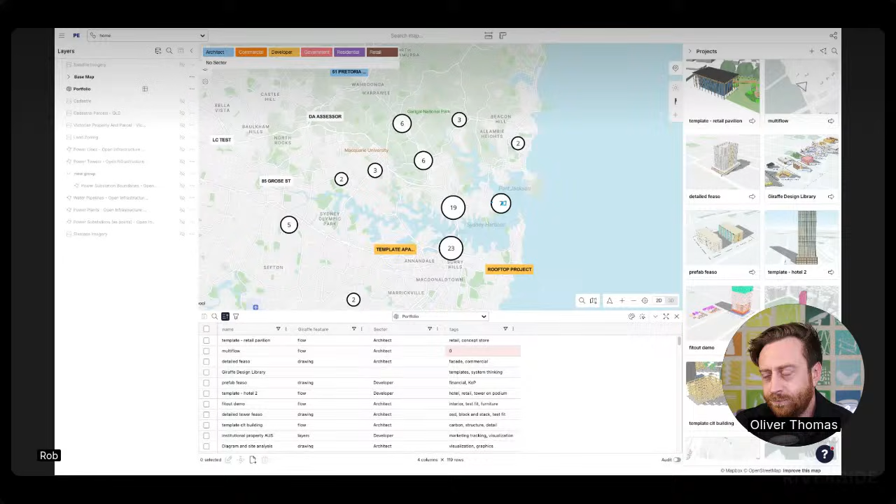The first thing that we did is kind of got a bit meta. So what you're seeing on the screen is all of my projects within this workspace. I'm actually a member of multiple workspaces, which I won't open because some are confidential - those can be clients. When you get Giraffe, you get a workspace, because in architectural practice, data leakiness is so huge and catastrophic that was almost one of the first things we tried to solve.

When I was in practice, I was always part of an ongoing research group around knowledge management - how do we manage firm knowledge? Everyone's got their little folders and scripts, etc. So this is what we theorized. In Giraffe, I see all my projects on the map because, uniquely, unlike Figma - a Figma board doesn't happen in space, but an architectural problem always happens in space. So I'm able to jump into these projects and see what's happening. I can see the preview over here and get metadata on the projects.

Like this is a deck with AI, or this is structure in Giraffe. I can tag it - every workspace will have different tags. Some developers may tag whether people are willing to sell, architects may tag by sector. I'm Giraffe, so I tag by Giraffe feature or sector - we sell to developers, governments, and architects. But then I also just add tags, and I can right click and open this project. What you're getting with this is the ability to jump in and out of projects, which is extremely powerful. If I get a call and someone's got a site over here, I may have done a project over there, or someone in my firm may have done more projects.

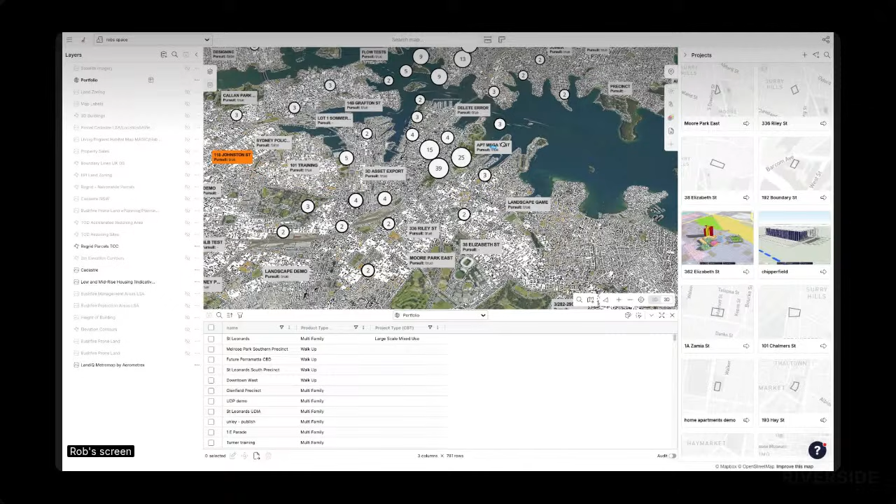But for an architectural practice, what this means is you've got your projects, plus you've got all the zoning and cadastral data and elevation data, and open infrastructure. So you've got the power lines, the temperature, whatever city or urban context you need to make a good design, to convince your client that you understand their site in a deeper way, or to actually understand their site in a deeper way, whether you're working at a master plan scale or an individual house scale.

This is just so important. To me, the foundation of good design is context analysis, and the foundation of context analysis is having some information. So the best thing to do is obviously go to the sites, stay there, take some photos, and the second best thing to do is just layer up the maps.

All right, so this is kind of like the meta, the Giraffe meta. So I'll get back to my portfolio enterprise, and then I'll create a project. I'll do one in Sydney, and let's just do one here.

So to create a project, the way I normally do it is turn on the cadastral parcels. I think this looks like a school. Yeah, that's a school. So let's acquire all of these sites over here and do some sort of project over here.

So you see, I can turn on like water pipes, and I've got the land zoning. So this is all R2, which in Sydney or New South Wales is low density res. But we're like you guys, we have a housing crisis. Everyone has a housing crisis. So there's massive upscaling and upzoning and systematization of

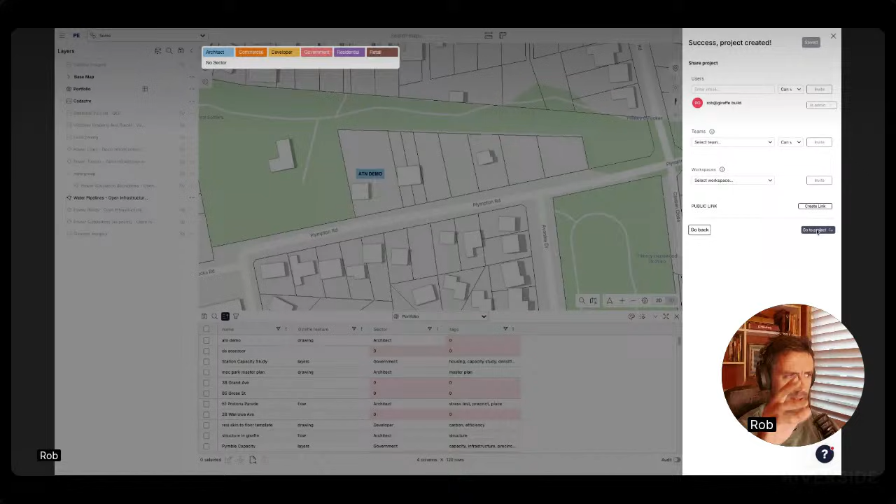That's just so I'll find that thing later, and then I save the project. Now I could apply a template and bring in or share this project at this moment. I could bring in custom templatized data layers, or usages and types, etc., or share it with teams, but I won't do that for now.

And now we're in the project, and I'm going to edit the boundary. So edit the project boundary just by typing the space bar, just like Rhino, and then stretching this out. So now my site boundary covers the parcels that I wanted to cover.

All right, and normally what I do now is kind of layer up something to understand this site. So I've got the Six Maps imagery, which is a government imagery service from the New South Wales government. And frequently I turn off, you see it says Plympton Road over there, I turn off the map labels and the trees.

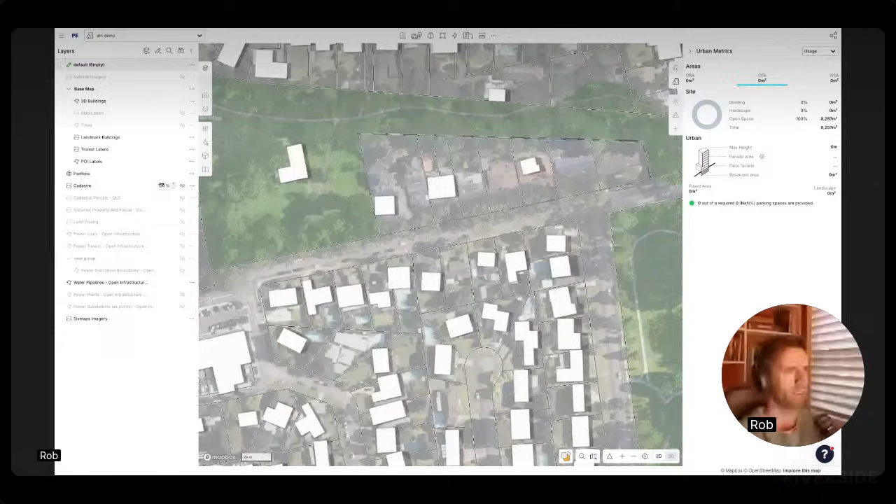And I also fade back the cadaster. And so Giraffe here is kind of like a little bit like maybe Adobe Illustrator or something like that, where I'm trying to achieve a graphic standard.

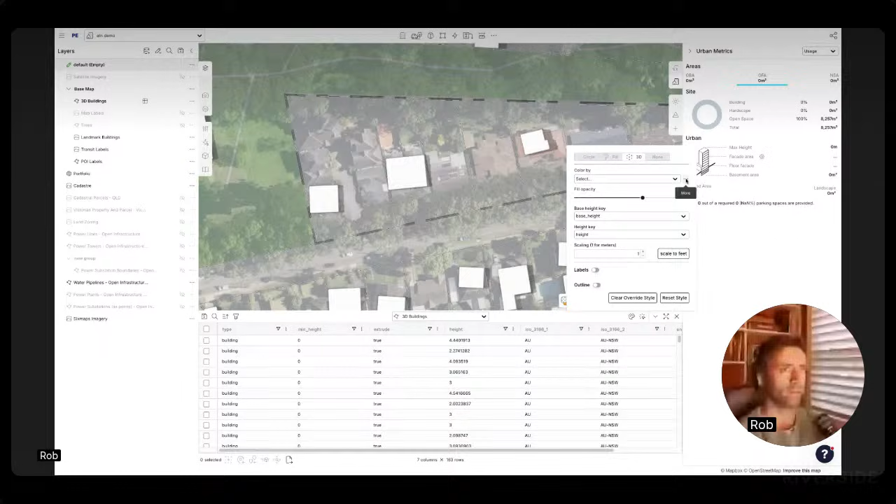And we can go quite deep. So if I open this 3D buildings layer here from Mapbox, I can click on this lens table, and I can restyle this entire layer. I can say, hey, for this I want to make it black, or I want to make these things red. And that'll make all the buildings red. So if you have a graphic style or standard within your firm, you can start mucking around with Giraffe.

It won't take you all the way to sort of Figma or Adobe, but it'll take you pretty far. And what's also really nice about it is you can do data-driven styling. So if I style the buildings by height, you can see these ones are taller than those ones, so they're a darker blue. And if I had richer data, say age or occupant or tenure type or program, then I would be able to style these buildings by those attributes.

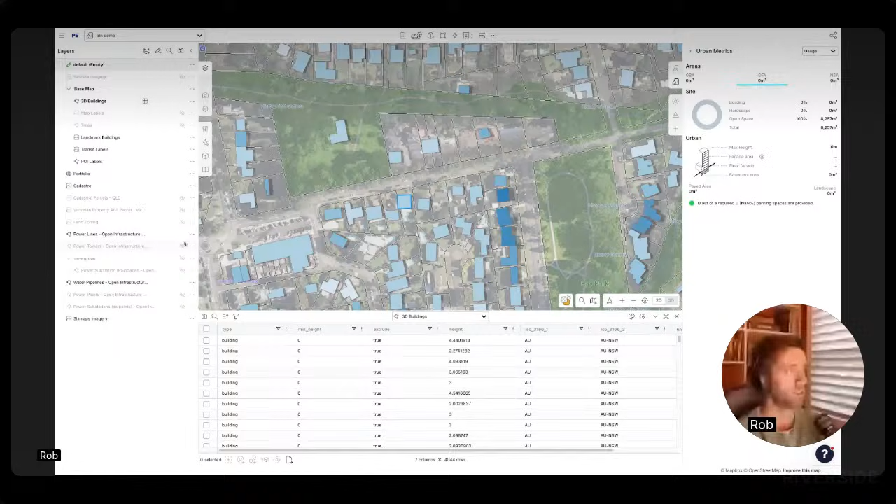So basically any vector data that comes into Giraffe, you can style. For example, if I zoom out, we find some power lines, these gray things, from open infrastructure. There's quite a lot of them, and you can see all this data coming through from the power line—the type of power line, so minor line and line. I think there's a voltage.

There is voltage, but the voltage in this area is not that great. So sometimes it shows you the voltage if the open infrastructure maintainers have added it. Other times it doesn't. So you may color these power lines by voltage.

But if we just zoom back to our place—it's easy to get lost in Giraffe because the map's always on, whether you're in your project or out of it, you can always see your portfolio as a layer, and you can also see all the data. So you're always in the world. We've got this little recenter button so you can find your way back.

All right, so let's get rid of that color and just make those buildings white again. Fixed color, something like that. Okay, so there they are.

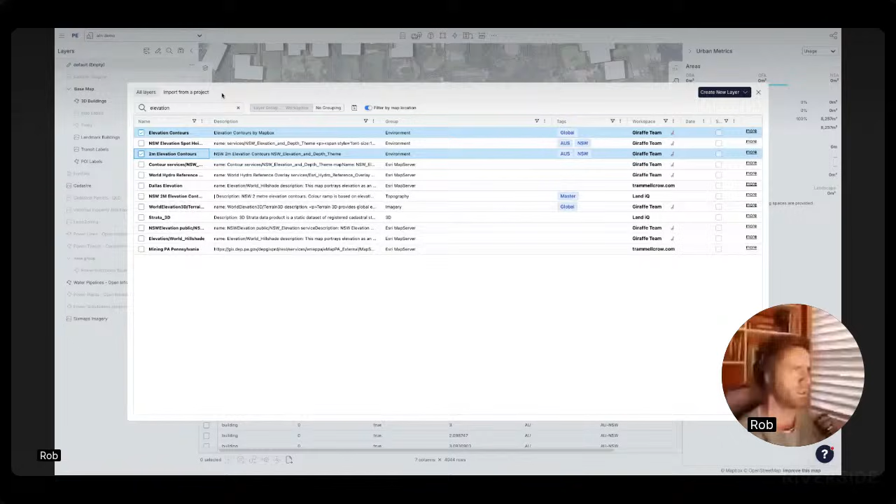All right, so let's say these houses are to be demolished, and we're going to do a master plan over here. So I've brought in the data—maybe we should talk elevation. I'll bring in the elevation contours. I can bring in the Mapbox ones, or New South Wales has them, the US has them—sort of every geography has them—and there they come at the bottom. It'll take a while for them to load. And if I fade back...

So I can also reorder the display of the layers. It's probably hard for you to see—sorry, if I actually reorder that. Oh, that's not working. But it's going from 100 to 92, so there's an 8 meter fall, so it's not huge. Okay, it wants me to do that. There we go. So now if I fade that back up—again, probably hard for you to see—but those elevation contours are sitting on top of that Six Maps imagery now.

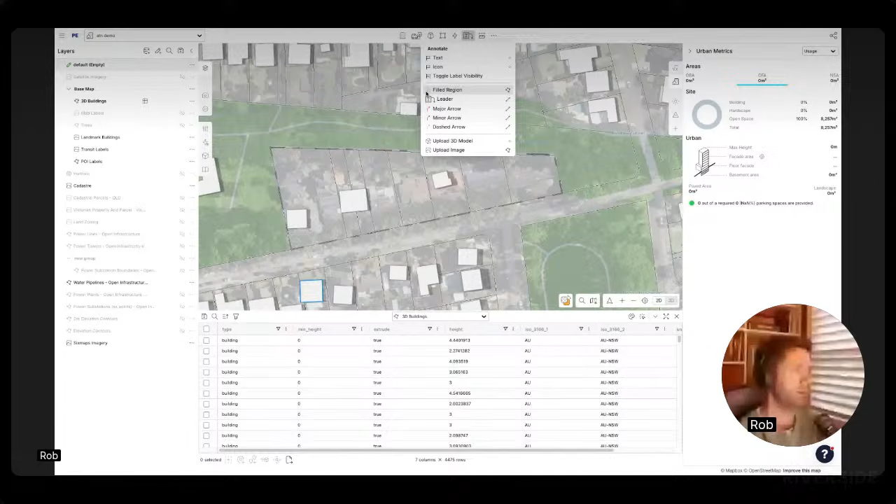All right, so let's say we've analyzed this site, we've looked at it, we've looked at nearby projects, we've got an idea from our client what they want to do. Now we can actually start, I guess, annotating. And so this is where Giraffe, again, is kind of like SketchUp—sorry, not like SketchUp, like Illustrator. It gets like SketchUp in a second.

And it's all property driven. So because Giraffe is GeoJSON, there are only 3 primitive data types, which is point, line, and polygon. I guess you could say multi-polygon, which is like a group of polygons. But if I draw a line like this, it comes in as a line, geolocated.

We're translating it to Cartesian, so it's lat long—if I show you this, it's got its coordinates, which are 151 minus 33, so latitude, longitude. However, we also have these Cartesian coordinates, which are translating it so it's in an X and Y space. So it'll come into Revit or Rhino according to a transformation.

If you guys have ever tried to geolocate a survey or had to work at scale and deal with shapefiles, with like Meerkat or Heron, there's a bunch of QGIS, there's a bunch of sort of geospatial stuff in Rhino and in the ecosystem.

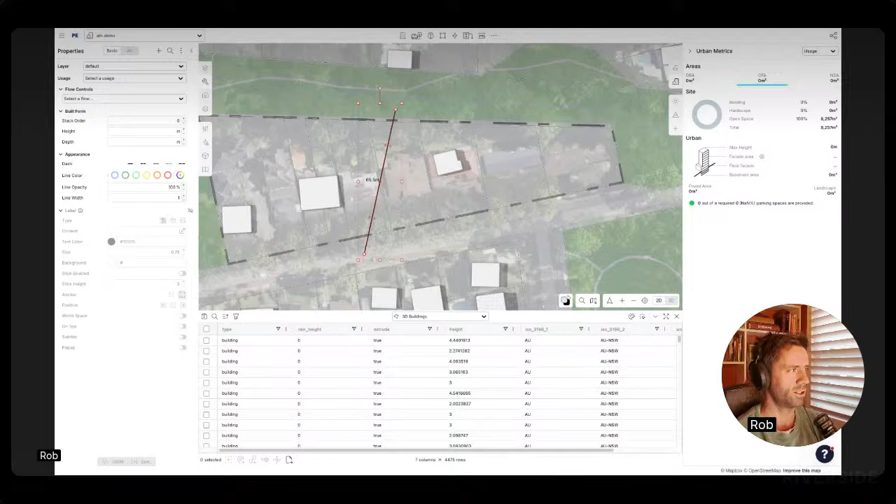You'd sort of know this pain. But this line is just a line, and these are its properties that it has right now.

If you look at the raw database, this JSON, this is what actually sits on the Giraffe database. So it's got a stack order, an app ID, a bunch of properties that make sense to the Giraffe system. So this is project 64994.

But now I can just add properties to this thing. So if I add like a stroke, just like SVG or Illustrator, and I make it red, and I hit save, the line goes red. And if I add stroke width, the line will take whatever stroke width I add. I think 1/8 maybe. There we go. So now I've got a really thick red line.

So instead of letting you muck around with this raw data, we just display the data over here. So you can see the line color is the stroke property, and I can then go and change it. So the way Giraffe works is the raw geometry plus these properties that you add get interpreted by the Giraffe engine and then get displayed or exported.

And once you've got that, you kind of get the whole of Giraffe. There may be other ways of doing this, but I think you sort of understand how data sits on a database. Like Revit, ArchiCAD, Rhino, I don't understand how you would store geometry and properties unless you have this kind of mechanism.

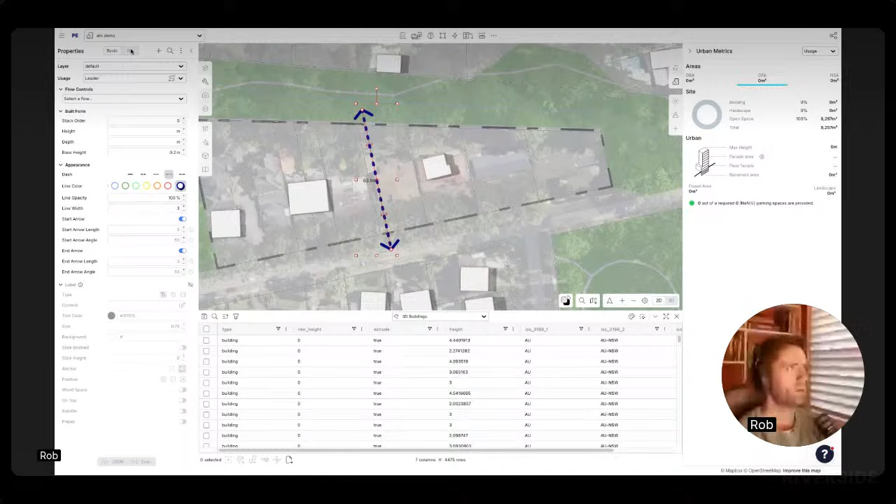So to make an arrow, what we need to do is add, let's do this dashed arrow, we just need to add a bunch of properties. Here they all are, there's stroke, dash, arrow end, all of this sort of stuff. But we just render and look at them nicely like this. So we can change the end arrow size, and I think even the angle, all sorts of these properties.

And make things look good. So enough of that, and properties, banging on about properties. Let's divide this site up architecturally and say, well, maybe what's cool here is, definitely what's cool about this site is it's surrounded by bush. So let's get rid of the stroke, make this arrow green, make it wider.

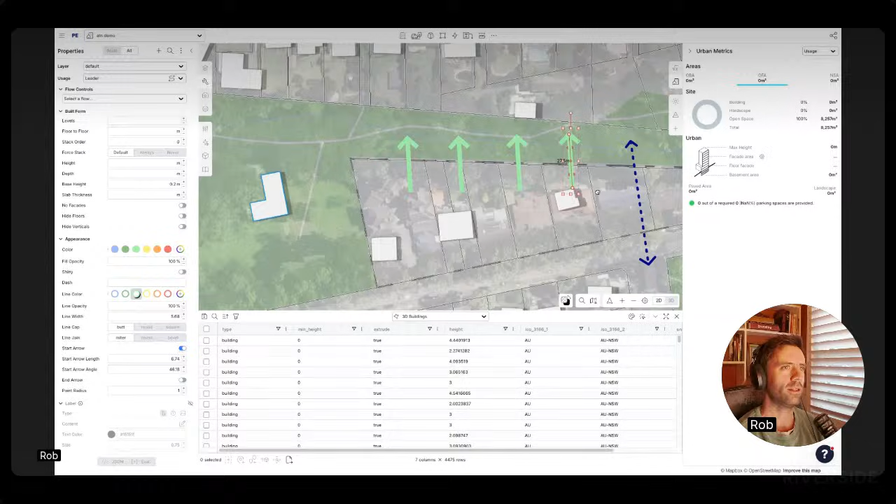You can even make it square, I only found this out recently. You can make square or round arrowheads. So I put in a feature request for it, and it was done, I just didn't know. So there's tons and tons of properties in the Giraffe system, and the more you know, it's probably about 200, 300.

Once you know them all, you can do anything, but often it takes a while to learn them all. I may zone some stuff up. We actually have, I think in here, a region. And maybe this is time for me to introduce the next concept in Giraffe, which is usages, which I would say is analogous to Revit families or categories.

Basically they're just buckets of properties that are not attached to any geometry. But I have a region property, a region category or usage that has a color baked in, and I'll make it a bit redder. It's got a fill opacity, a dash array, a line width, a whole bunch of properties.

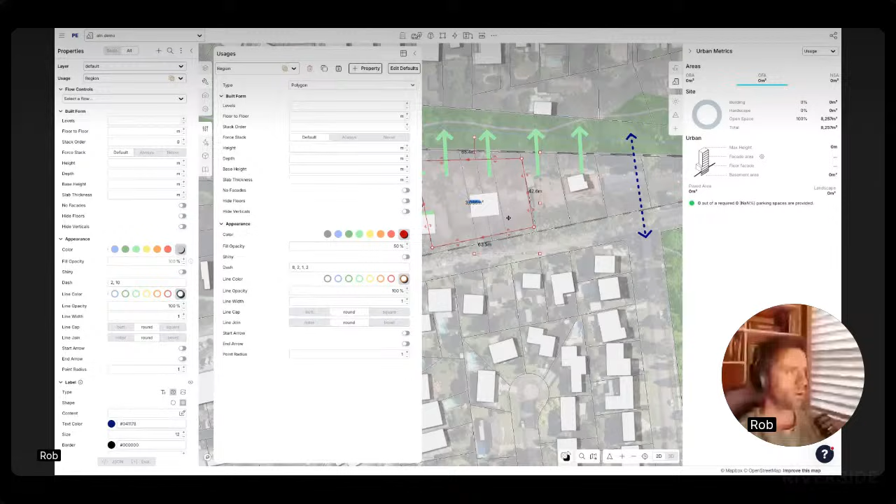It's called region, and if I apply this region usage to this geometry, it's going to get all of those properties. Let me turn off the imagery just so you can see that clearly. So now this is applying to this geometry. It doesn't have this red color itself, but it flows down through the usage. So there's actually two ways you can apply properties to a Giraffe geometry, either directly or through these usages.

I'll save that, no, cancel, I'll save that. Let's make this a bit darker, and just make this 1, and save that. All right, and you can see I made it lighter. There we go, so now you can see it's all flowing through.

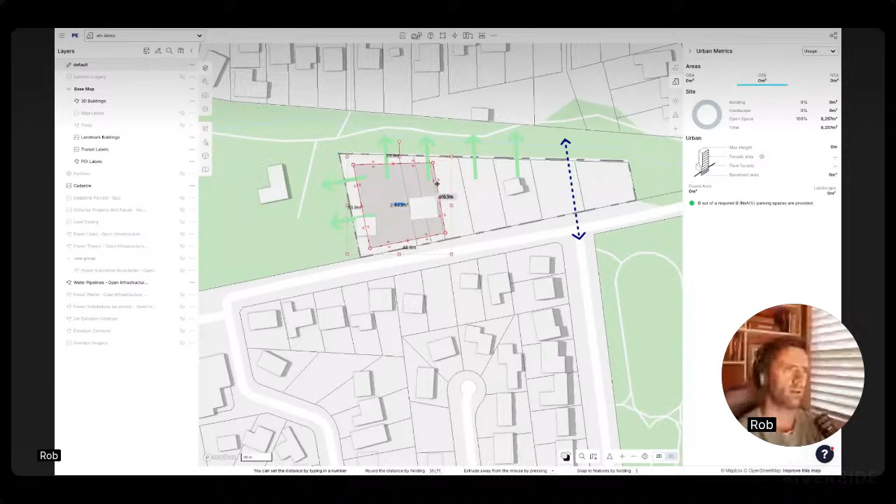What I'm trying to do here is divide the site into buildable areas. You can see it's giving a label there of 2,800 square meters. So maybe we'll divide something like this.

Since we need a connection there, there's really half a parcel back here we'll do something with—we'll figure that out. So there's our three pads where we'll put built form. I'm going to turn off the buildings because they're frustrating for now, and change this color to make it a bit darker. There we go—I've done the crudest of crude site analyses, sort of design moves and diagrams.

And now we can actually start drawing. And that graphically is not terrible, right? The goal here is that you can put this in front of a client and not feel embarrassed. You can do this live with a client, sitting with them and drawing.

Now things will speed up a lot, because the next thing Giraffe becomes is kind of like SketchUp. So my usages include not only arrow types and region types, but also all the built form and program. I've got a retail usage, and it's a bit richer—it's got a floor to floor, an efficiency and a sell efficiency, a parking required, and a whole bunch of data around how many jobs this creates, the net rent, the construction cost. And you as a user can always add your own.

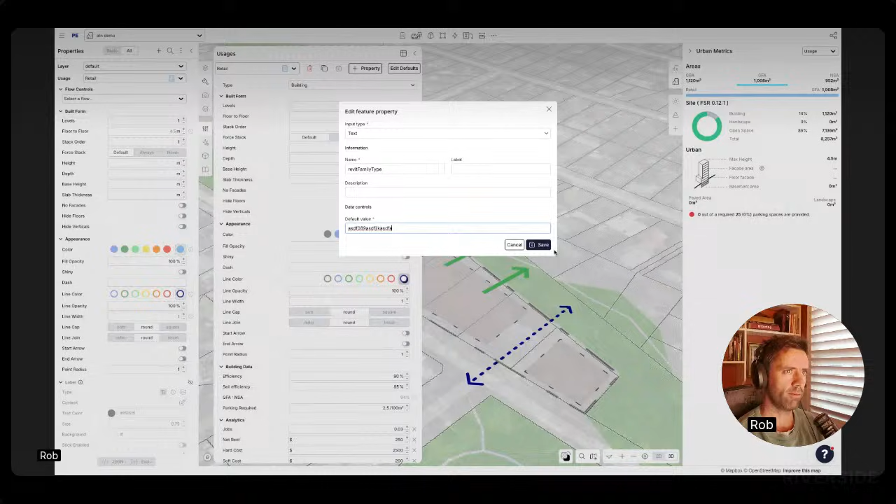You could add a Revit family type or whatever it would be, create that property, and make it text—either put in a hash ID or a name, whatever you'd want. Your client may have four or five types of retail, or you may want to know KPA, like kilopascal on the structural slab, or the power draw. You just add these properties to the retail usage, and when the designer is drawing the shape, all of those properties flow through.

It's very much like SketchUp. So what I'll do—this is annoying, you can see I'm selecting the wrong thing there—is chuck all of this stuff onto a different layer. I can either go to the layer menu and create a layer, or use this nice little convenient shortcut. I'll call this 'site analysis' and create that layer, so now all of that stuff's on site analysis. Then I'll activate the default layer so I'm drawing on it, and lock site analysis.

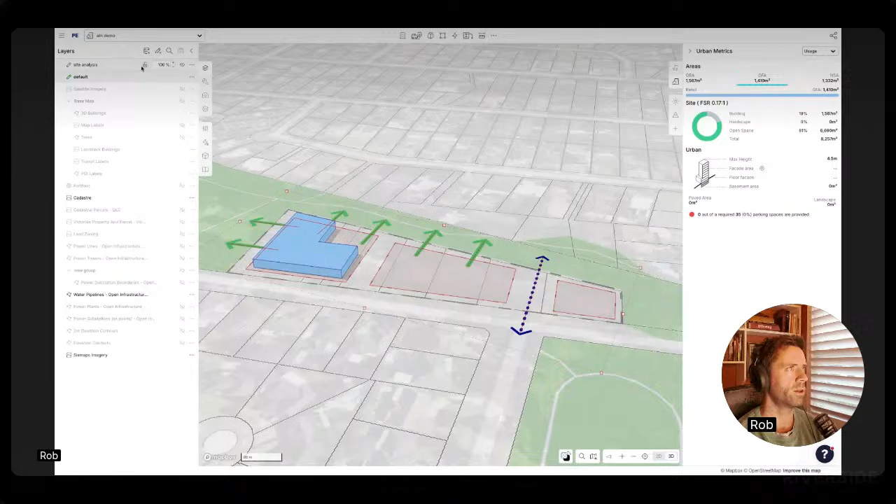And now I should not—see, now I can't click on it, very much like Rhino or ArchiCAD or any package you've ever used, Photoshop. It's very shortcut based—I'm mad about shortcuts—so I can add and remove levels, hit X and split, and sculpt and form that way.

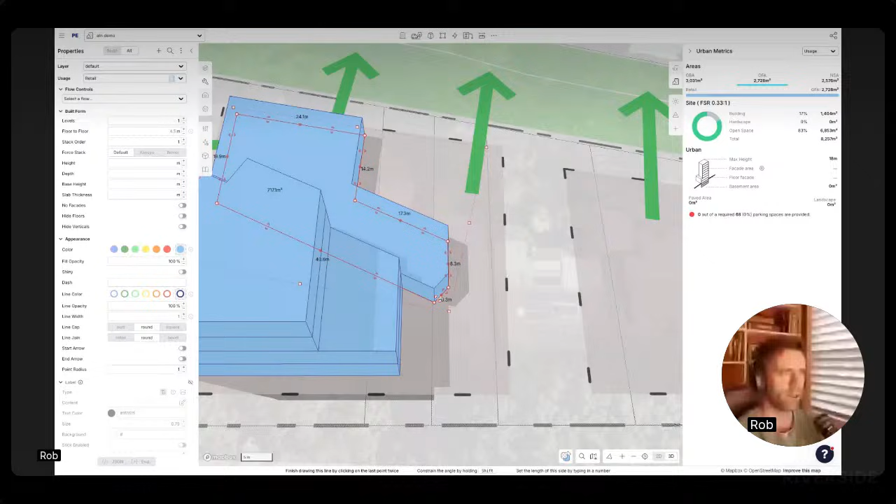Giraffe is very much designed to be playful. You're sitting in a meeting or a design charrette, seeing stuff live, just playing with form, and someone says, 'No, that's not going to work, that's a terrible acute angle'—it feels like you're being attacked. So we can just chamfer that off, cut this thing, or say, well, does this work? Should we put a little through-site link like that?

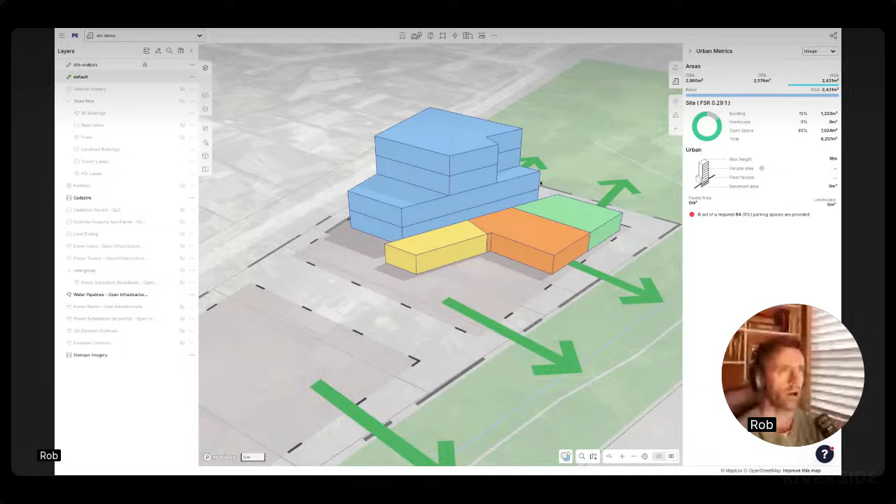You can't intersect points in Giraffe, so self-intersecting polygons will throw that error you just saw, and we can divide stuff up and recolor things—maybe that's a cafe, that's a library, that's a liquor store, whatever it is. So you can chop and plan and slice. And what's happening is the Giraffe system on the right-hand side is doing all the area calculations all the time—total retail, gross building, net building, sellable building, maximum height, facade area if you turn it on. A whole bunch of data is dropping out of this very simple model all the time.

That's kind of our point—that's the stuff the computer's really good at: taking complex sets of assumptions, hundreds and hundreds of data points, doing hundreds and hundreds, if not thousands and thousands of calculations, and presenting the result back to you. To me, that's the best use of AI—it's tedious and annoying, and you get the computer to do it for you.

All right, so we've got our weird little retail thing over there, and we'll put some residential. Maybe this is the next thing that we can add in. So we've got the maps that I've shown, the mapping, and this sort of usage data category stuff.

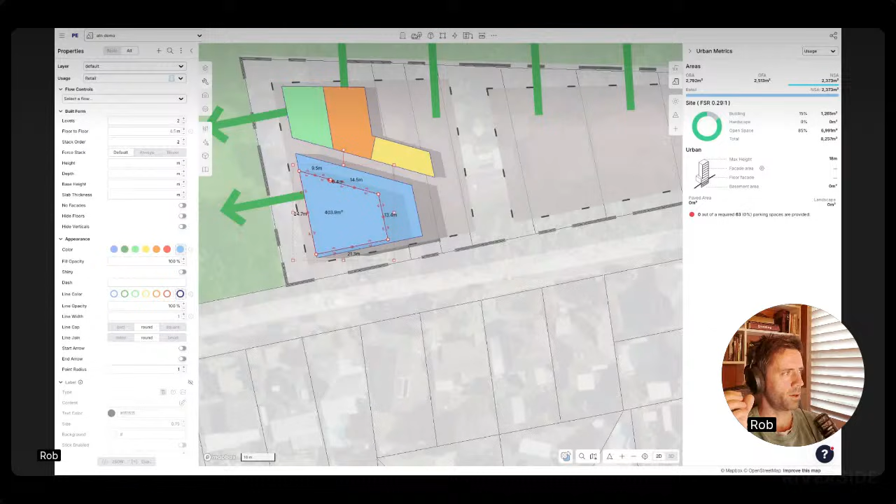The next thing we have is actually like a grasshopper in Giraffe. I loved Grasshopper, and this whole geometry, this root geometry with properties on it, was basically the way that you use Grasshopper. It was so heavily informed by that, where you draw two lines in Rhino, put one on one layer and one on another layer, then read those lines into Grasshopper and do stuff with them. That's where that came from.

So we have algorithms. If I want apartments, I can draw a single line, and the computer generates all of these apartments. And if you want to understand a bit more about that data flow, you can see what's going on here. You just read the feature and create an apartment.

This box here, our team builds. We build what I call the big algorithms, things like apartments, subdivision, and a few others. The key to look for is dendrogram, that's our big one. So apartments, enclosed polygon is huge. Envelope is great, I'll show you envelope in a second. Grid fill is fantastic, that makes a grid of columns.

Parking lots, that's another massive one. But then we've got all the classic small ones like add, map, all the ones you'd see in Grasshopper—take the first item, divide, construct a vector. I can double click on the canvas and look for these things: vector, vector angle, vector from north, all of these sort of things.

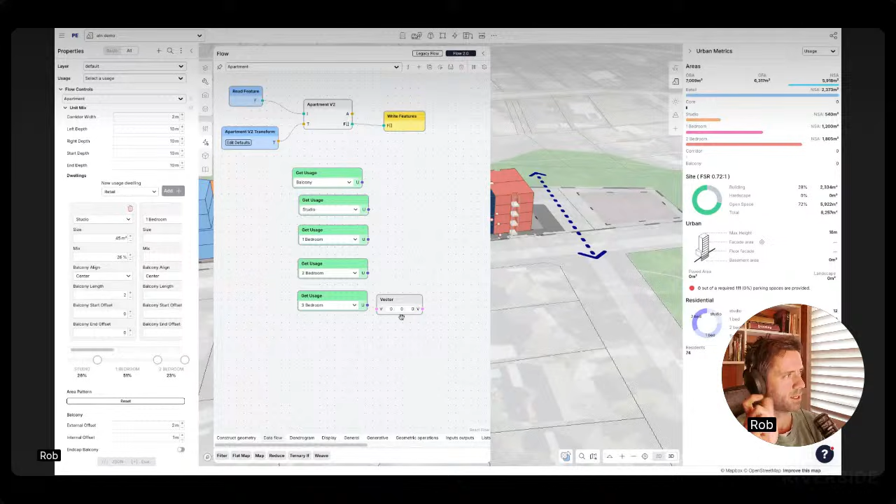So I call these ones small algorithms. These are normally doing something very small, very discrete, and you join them together. This is a big monster, but it does a very useful job very quickly.

So let's say we're going to do this. We're going to do this. And these kind of little Juliet balconies are not doing it for me. We can change that—you can parameterize all of those things. You can change the internal and the external offsets, so you can have them basically fully inside the buildings like this.

Because this algorithm is so big—there's been many, many person years of development on this algorithm—it's got a lot of depth and complexity, and it can do a lot of things. So have a play with it. It can't do everything, but it can do a lot of things.

One thing it can't do, for example, is deal with the ends of buildings. So often what we suggest is if you have a building like this, use the algorithm to draw most of it, but then draw the end bit yourself. So maybe we'll put one large 3-bedroom apartment over there, and then I'll just draw the balcony in manually.

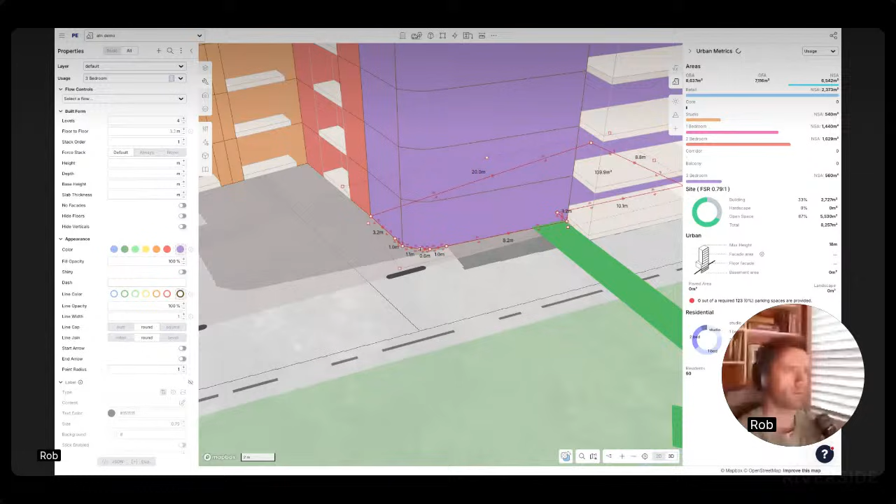This mixture between automatic and manual is a key thing that Giraffe also tries to do, because every project's unique—you always need to jump in. Can we chamfer around one corner? No, you have to do it manually, like I'm doing now.

All right, so there's our building, and some other algorithms, like some classic ones, would be some landscape—so we can do like a row of trees. If you look at what's happening here, it's just grabbing a line, putting an array on it, and then writing this feature out. It's a very, very simple little algorithm.

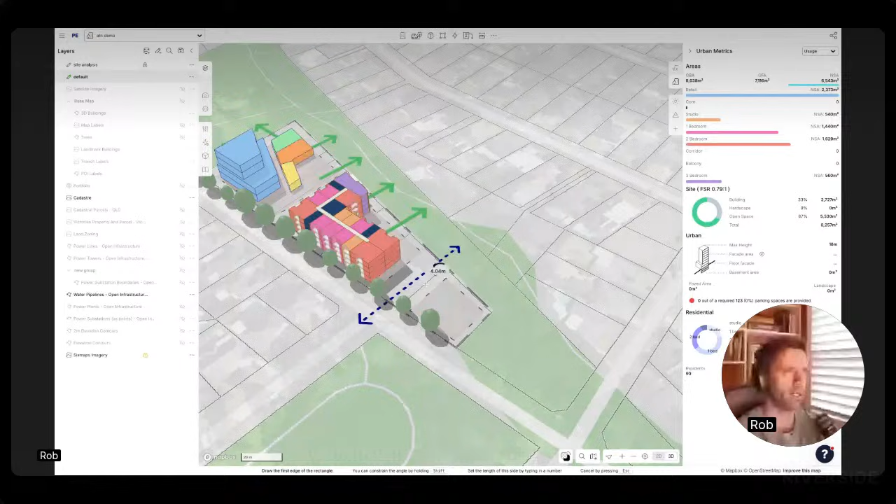I'll do this little parklet—I like this tree-lined park. Maybe we need a sports field over here, or not a sports field, but a dog park. And that one's pretty easy. What it's doing is taking the raw geometry, rounding the corners by 10 meters, which is maybe too much—let's go 5 meters—and then grabbing the edge, putting the trees, and outputting the trees in the park.

Sort of that simple. And I can change the colors, etc., by mucking around with my usages. So the usages, the guiding geometry, the little polygon, and the flow all work together, and there's this cascade of data through the system, which means I don't have to do much and the system does heaps. So I've got a dwelling mix, I know how many car parks I need, and I know my landscaped area.

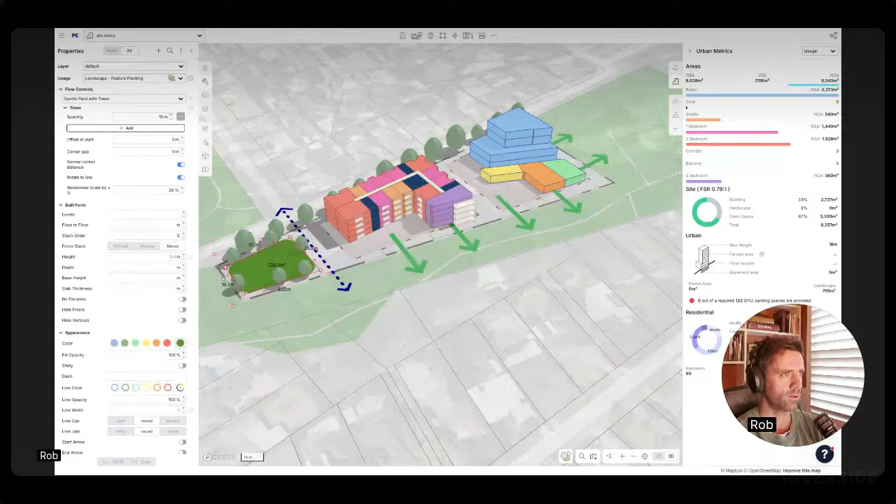I can do my facade area. I've got so much information, but I don't even look at the right-hand panel - I just don't munge that data, Giraffe's doing all of that. What I, as the architect or designer, need to understand is how this system is architected, how the data flows through, and then be able to leverage it. I'd say it's very similar to Excel - like building an area schedule, a financial model, or a zoned program in Excel. In Giraffe, you should think of it as maybe 3 or 4 Excel sheets: there's the inputs, the geometries, the flows, the transformations. But once you've got it worked out, it works like an absolute charm.

So let's do another option now, and I'll build a flow for you because I think that could be fun. So this is the default. What I'll do is duplicate this layer, turn off default, and rename default to option 1, and default copy to option 2. The amount of time we've spent trying to make this layer menu nice - so you can double click and resort and group, etc. - is extreme. So these are the options.

So I can collapse that, turn off everything, open it, turn on everything. It's fun. Okay, so here's option 2.

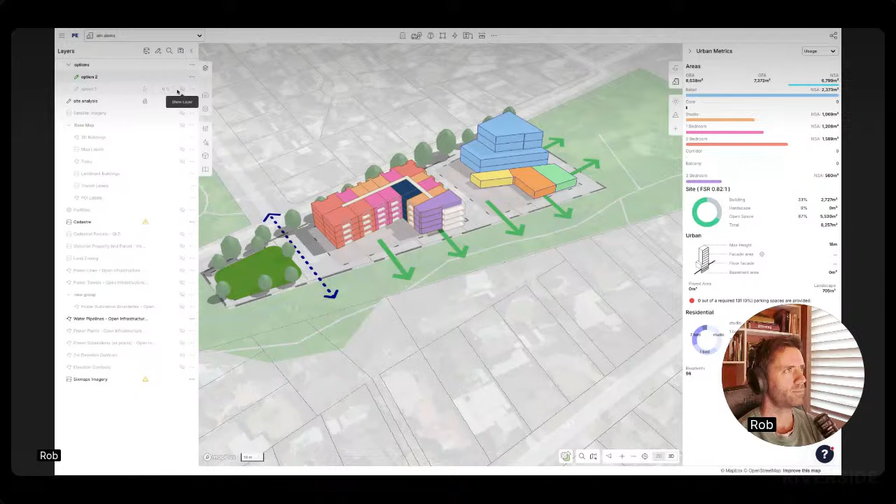So for option 2, I'm going to say we need a difference. Maybe instead of an L-shaped building, we do a high building like this. And I guess we better do that like this, and maybe we do another one, right, this - and I'll just drop those guys off like that. Maybe not the world's most efficient building, and it's got a suitably dystopian feel. There we go.

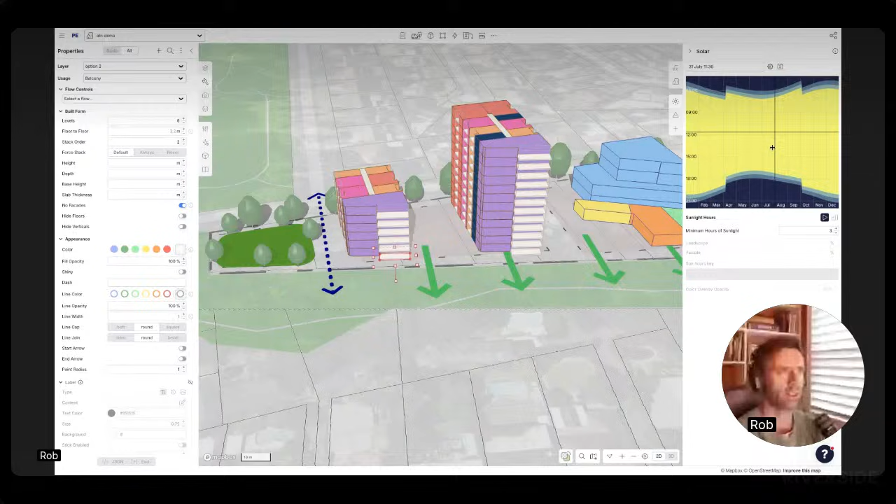Now look at that - look at the sun, right? Because we've got the solar in here, we can test the sun at any moment. You can see that's not working in winter - this is every day of the year. You can see the daylight saving. Here's winter in Australia - it never gets that dark, but I've changed the time. This is one day, the 27th of July, but I can also change the day and keep the time constant. So obviously the sun is most annoying in winter, and actually this is totally fine because this is facing north - this place is always going to get a bit of sun.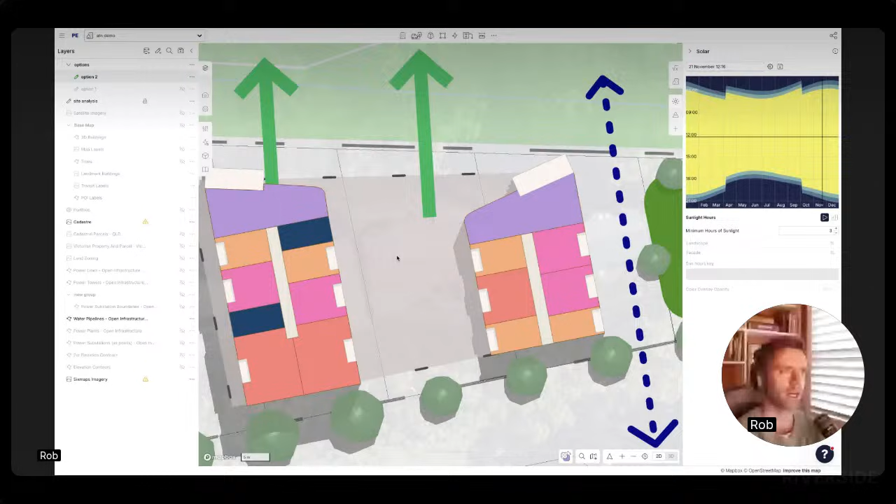Something you may do is I'm just going to mirror this. So I use the snap key and the mirror key, and now I'm using the base point move by hitting B - so B, snap, and then shift B to rotate, so I get that thing exactly right. So now I'm making more of a sun trap over there.

And now let's make a flow. Let's say the scheme is accepted and people are interested, and now we just need to do a bit of design development. These trees are too big, so I'll add a scale parameter and just scale them down - scale property. I could put them on a landscape layer if I wanted to. But let's make a flow.

What I'll do is a very simple flow which articulates the facade. Okay, hang on, I moved way too quickly there. In Giraffe, not like Grasshopper, the flow lives on the geometry. So now I've created this identity flow and attached it to this geometry - this geometry had no flow. So this identity flow, let's rename it - I'm going to call it Facade Maker.

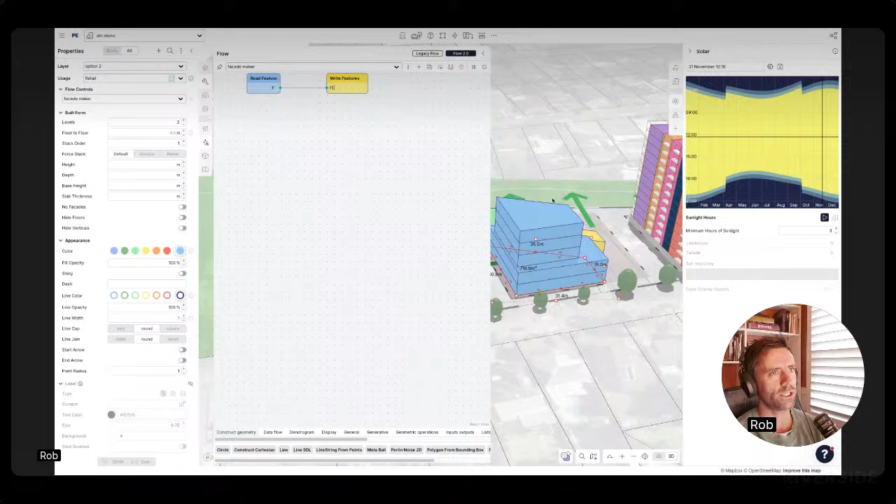Right, so now this geometry has Facade Maker. This Facade Maker flow is in the document, in the project, so I can go and apply it to anything I want. But you don't reference geometries into the flow - you reference flows onto the geometries. You can reference geometries into the flow, but you need to reference a flow onto the geometry. I'll show you why that's cool in a second.

All right, so here's Facade Maker, and by default it reads the root feature - that's this feature, it reads it in and then just writes it out. Now what I'm going to do is muck around with this geometry and write it out, using this stroke dash transform that we have. Stroke dash is a cool transform.

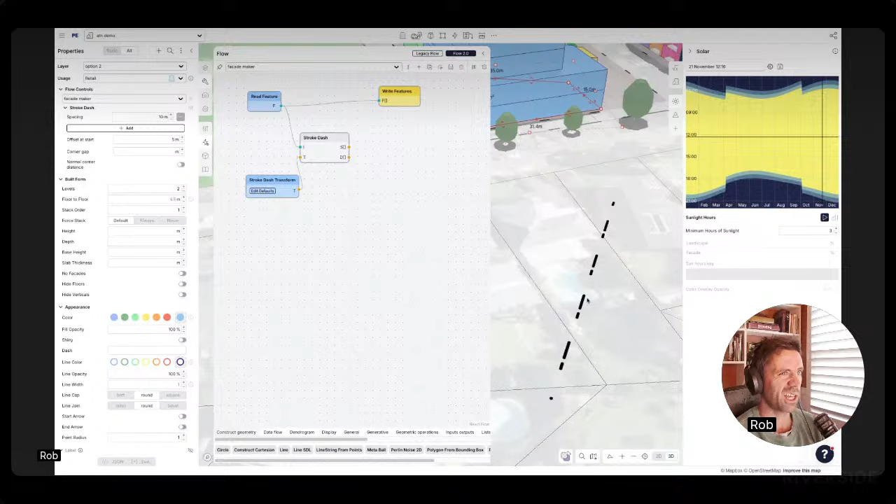It takes in a line or a polygon and converts it to a line, and it breaks it into a pattern, a stroke dash pattern. Very similar to SVG. So if you have a line, you see this dash, and if I go 1, 5, 3, 1, it breaks it into a 1, 5, 3, 1 pattern. The stroke dash turns into those stroke dashes, which is like the fundamentals of architecture.

It's just syncopated grids, Chipperfield, rhythm, and I'll show you that in a second. So we have the stroke dash algorithm. The transform is the parameters, it's this stuff over here. So it's the spacing. If I want to go 1, 5, 3, 1, we've just got a UI that's creating that stroke dash pattern.

I'll bring in a reader panel over here to see what's happening. And to actually see the data in this flow, you have to click these goggles. There you can see the data coming out of this transform. So there's 1, 5, 3, 1, and there's the offset of 5 at the start. So that's what the actual transform is. That basically goes into this stroke dash algorithm and tells it what to do. That's how you tweak the nodes, whatever they are, the knobs.

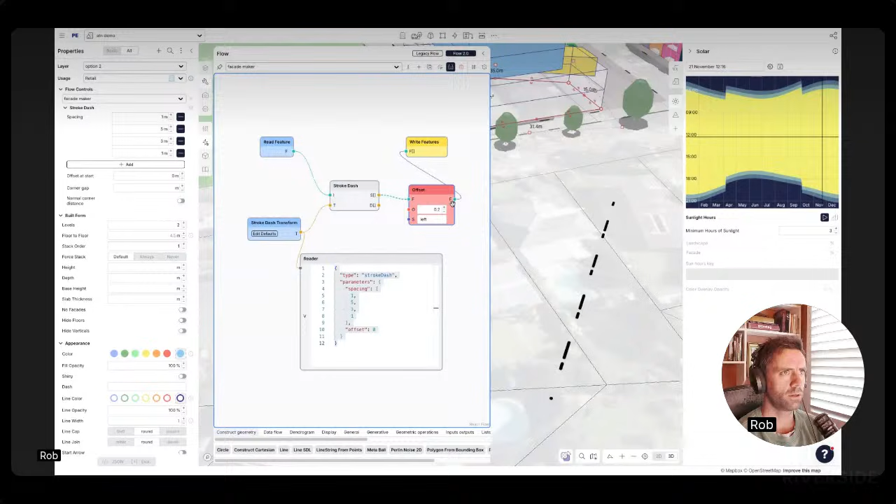And then I'm going to do an offset. So I'm going to grab the strokes and offset them to the left, and I'm going to offset them 0.2. All right, and I get nothing.

This is why, okay, now the reason I get nothing is because this is an array of strokes, and this offset requires a feature. So you can see there's the square brackets, it means an array. Now, Grasshopper does all this implicit array mapping. So if you put an array into a box or a battery in Grasshopper, it automatically passes that array.

And that's why you have these trees and this tree matching stuff, which is really fun, but also very difficult to maintain, and I would say almost insane at scale. You see people do these huge scripts, and they've got these trees, and once you've got 3 nested trees, you're absolutely cooked.

So we just use map, and map basically, it's like a loop. You take in an array, you map over, so you apply a function to every element in the array. We do it very explicitly, which is a bit more cumbersome, but in terms of maintenance, it's much easier. And so you can see now I get this thing.

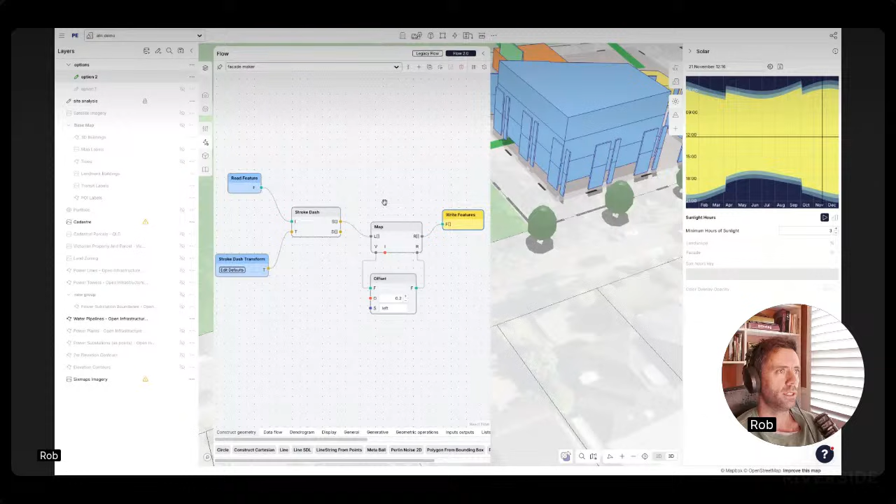So now what I need to do is, you can see I'm writing out my root feature, which is this retail. And now you can see there's a little facade over there, which isn't great. It's also retail, so there's a couple of options I have here.

I can write a feature property, right? And because we know that Giraffe is just properties, I'll get a parameter, an input parameter, and I'll call it facade color. I'll select the type color and default it to like a bricky brown. And so now I'm grabbing this and writing a color, and now it goes brown.

And now you'll say, well, how did that array, how did that feature pass that array? Some of our batteries support array passing. But what I should really do is be consistent and put everything inside a map. We're sort of slowly trying to be smart in terms of how things are passed.

And sorry, my graphics card is just stuttering there. I'm going to refresh and hope for the best. Okay, fantastic. That's the other nice thing about Giraffe, sorry, is that it's all in the browser. You just hit refresh and it comes back. It takes a while for the sun to load in the right spot. There we go. Okay, so let's get back into that flow.

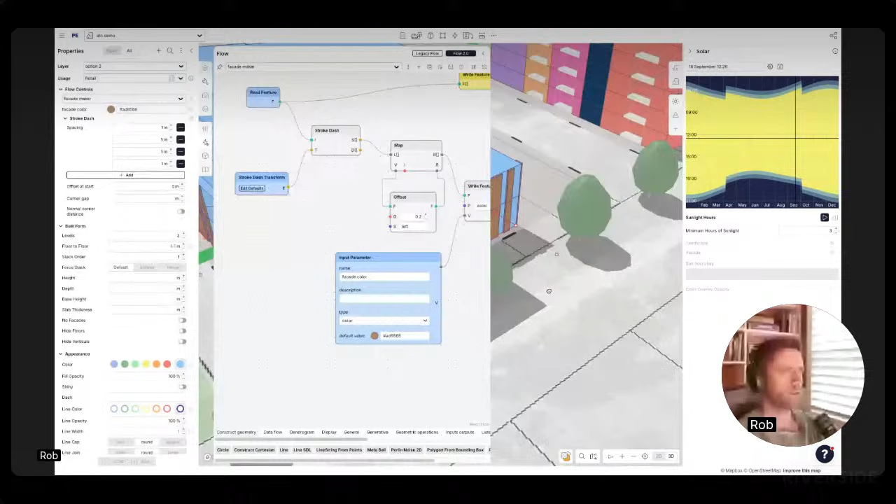There it is, so it's going brown and we're getting the stroke dash. All right, and now what I'm going to do is the exact same thing on the dashes. So the strokes are these bits and the dashes are the other bits, the negatives. I'm just going to copy this by holding Option, and I'm going to put this into dash, right? And so now, because I'm doing strokes and dashes, I'm getting everything.

And then I'm going to write another feature property. This is another Giraffe property called no facade. And no facade makes no facade.

There we go, and now I have this facade. I don't want this thing to be a sill, I want it a bit higher. So I'll write one more feature property, base height, and set it to, I don't know, 3 or something. Just 3. Let's see what that does. There we go, okay cool.

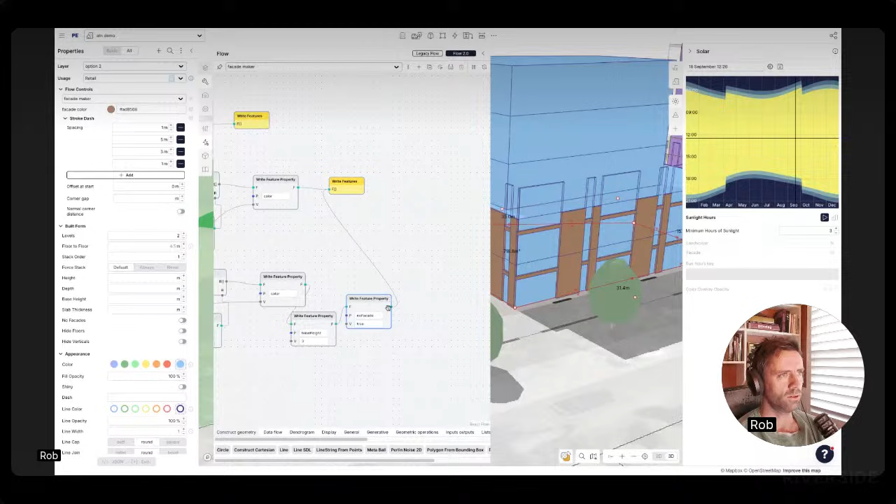Now you can see those verticals. When we do no facade in Giraffe, we render the verticals out unless you do hide verticals. So I'll write one last property, I think it's hide verticals.

I was on the draw layer, was not the active layer. So if I do a 1-bedroom, right, there's my usage. If I click no facade, the facades disappear. And if I hide verticals, the verticals disappear. Okay, and it's hide verticals. So if you get stuck and you're trying to understand what Giraffe's doing, you just click on, do it, look at the data, and then come back into here. So hide verticals.

And set that to true. And I would say what I'm doing here is probably the bad way, because I'm explicitly writing these properties down here in the flow. Whereas what I should do is create a usage here called facade, and set hide verticals true and no facades, and do all of that stuff here. So I should have mullion, transom, and my facade components. That would work really well.

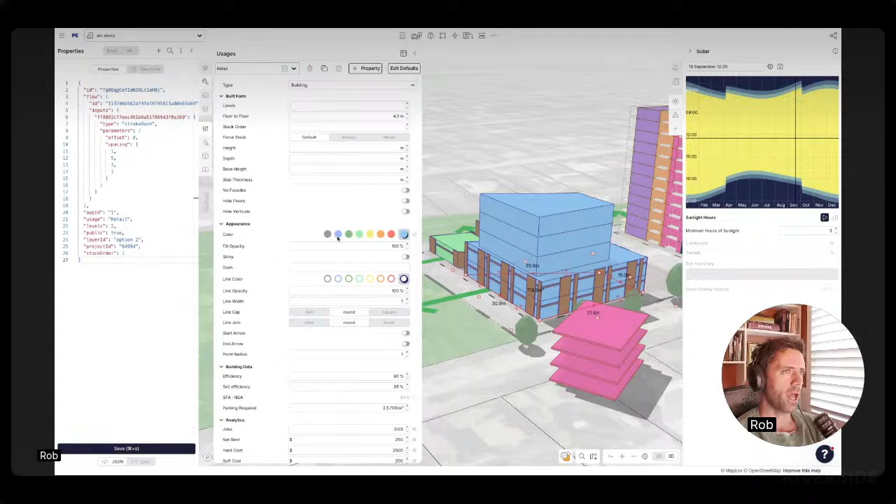But now what's nice is you can see, because I applied this facade to this thing, it got applied to this thing too. And I'm just going to hit never stack, so the facade's stacking over there. So now I've got one flow applied to 2 geometries — it's applied here and it's applied here.

Now what's really cool is the parameters that I input. So for this flow, that's anything that's blue — the feature, the stroke dash transform, and the input parameter facade color — those are saved per feature, because obviously the feature is different. So this green feature is this blue on this one, and this blue feature is this blue on this one.

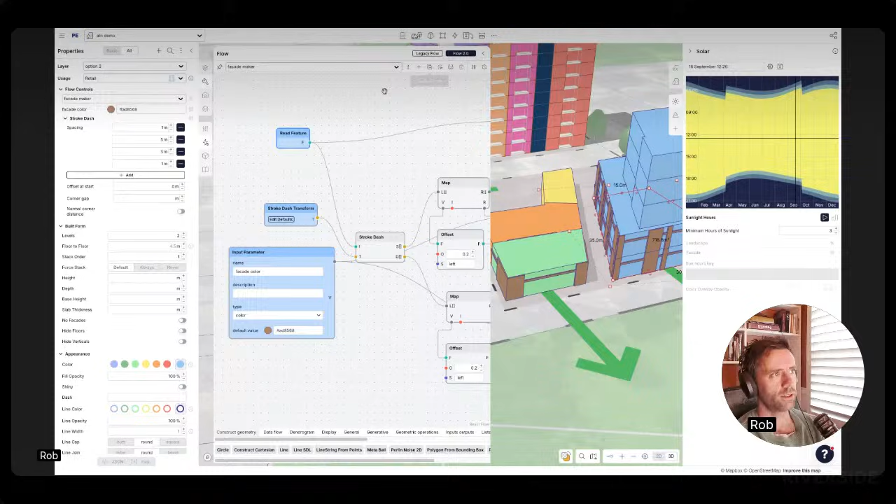And so what I'm able to do is set this to 1, and set this to green or yellow or whatever I want, maybe like a white color, and build these facades out like this. So that's one piece of logic that's now repeating across, and I can go and apply it to all of these things. I can just keep putting the facade maker on this stuff and changing the stroke dash array.

So maybe it's 1 and then 2, or maybe it's 0.1 and then 2, and maybe that's 0. Once we start doing this stuff and get a bit further into design development, we want to parameterize that offset. So we just add an input parameter — this will be facade depth. It should be a number. Actually, I want it over on the blade, not on the transom. And the default value should be 0.2, and that should work.

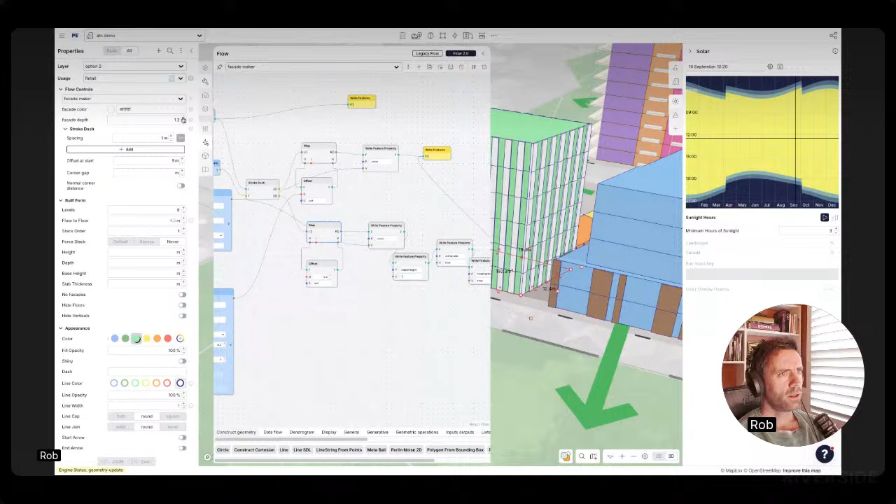Facade depth number. Wonder why I'm not getting the offset number, the offset side, the offset number. Okay, so now, sorry, something unexpected is happening and I don't know what it is. Oh, I know what's happened — the graphics card again is frozen. Sorry, filming the screen and doing Giraffe, it's all too much. That's what I expected to see.

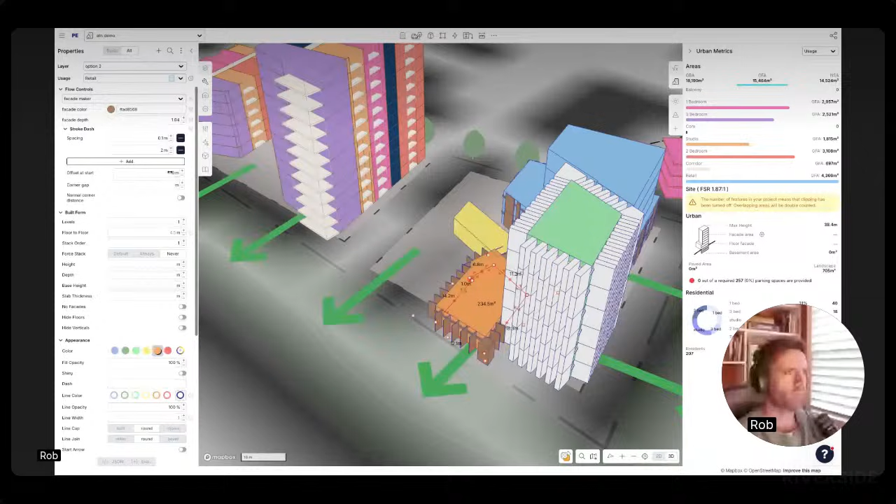All right, so you can see I've got this offset depth now parameterized, right? So I can do this. And this one is also parameterized, coming out 3 meters. So now you can add a bit of depth to the facade, and it's parameterized per geometry. Okay cool, so hopefully that makes sense.

You can imagine having lots and lots of these flows, and I'll jump around a bit now and show you some more. But I just wanted to build one up from first principles. You can change your graphic styles, you can chuck this in Nano Banana now and get some unbelievable images, and yeah, that's sort of the way the tool works. You can see I'm mucking around with the display and changing the line colors, etc.

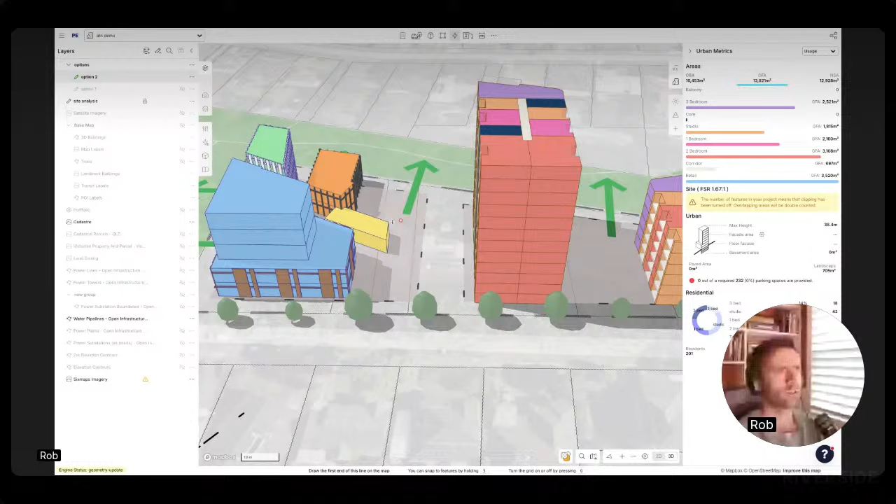Let's delete that, and I'll add some roads, because why not? So infrastructure, road with trees, and another road with trees. Oh no, that's our park. So let's put a road with trees over here.

So yeah, a lot of these things you're seeing here are just flows, and these are our default flows.

Let me show you one I was working on yesterday, which I was very happy with. This is called a dingbat building. It's in LA, called the dingbat building, where the car parks are under the building. So this is just a flow, and what it's doing is solving for a dingbat building.

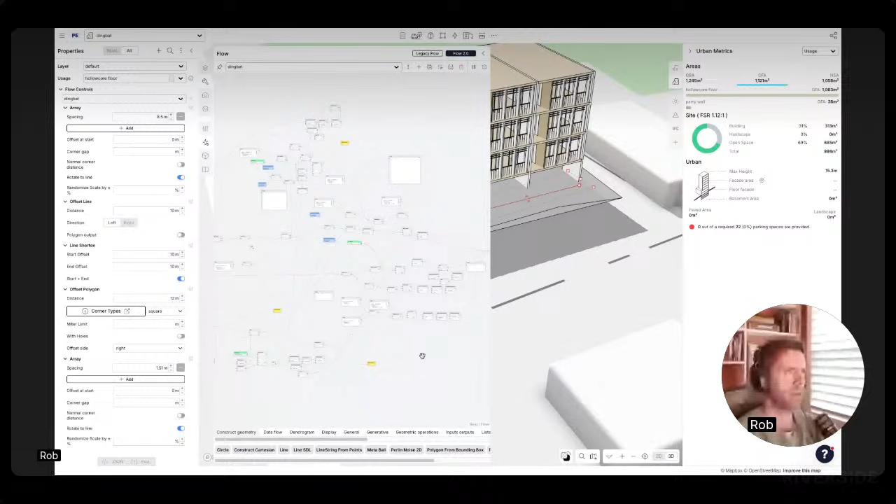If I open it up, it looks like this. So it's more developed, a fair bit of logic. It's using our block editor, so we have these blocks. I've got a dingbat service wall block, that's a kitchen, a bathroom, and then this facade element, and then those doors. If I come around the back of the building, which I haven't done, there's the kitchen, the bathroom, and there is this facade element.

So I'm just placing a block, and I have another block, which is my facade screen, which looks like this. And just like you would think of a block editor, if I jump into this and make this stuff a different color, like a darker gray, and hit save, those guys become a darker gray. So any kind of block, as you update the blocks, all the block instances change.

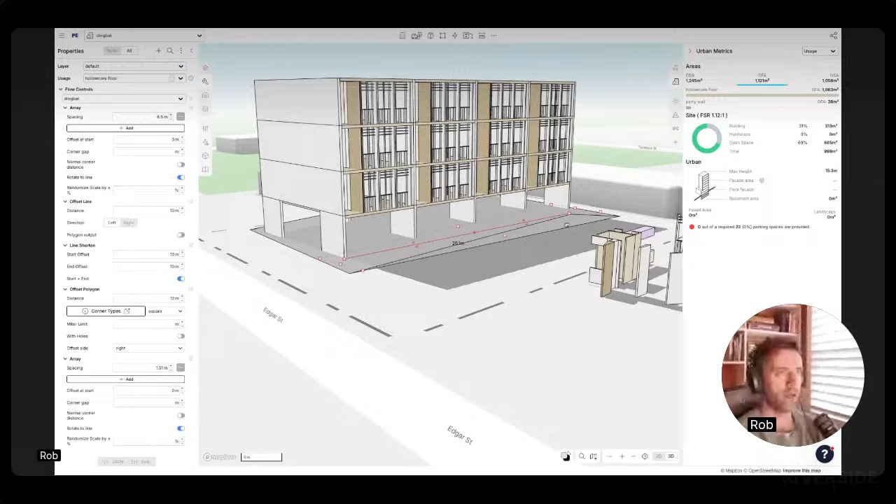So here I'm using a number of data sources. I've got all my properties, like this hollow core floor, which has these properties, no facades. I'm using flow, quite a complex flow, to subdivide these things. And then I'm using blocks to instantiate geometries that are nested into that flow, and then I've got the geometry. So I'm getting a relatively diverse set of data sources all working for me.

Here's another one that I'd like to show you, and this is maybe the last kind of thing I'll show. I don't know how much longer, maybe 10 minutes, so if there's any questions, let me know. And let me turn this off.

I think feel free to keep flowing, we don't have to have a hard cut off, but yeah, cool. Yeah, it's really cool to see it in action.

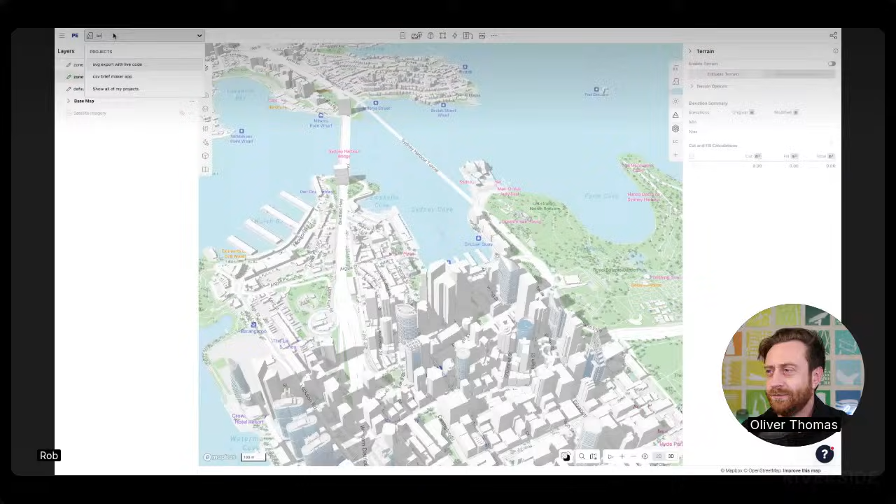Let me show you this—let me show you SVG Exporter. Okay, so this is what I was talking about at the start. There's one more way of telling Giraffe how to work for you. So we've got flow, we've got the usages, we've got the drawing tools, we've got the mapping.

And probably the biggest feature is our SDK. An SDK is just a software developer's kit. It's basically like the Revit API, or like doing C# in Rhino, where you can write bits of textual code that interact with the Giraffe model. So we've got this app store, and each of these are apps written in JavaScript that come in and do stuff, right?

Some of our clients write these apps for themselves, and we write some, and they could do anything—they could do anything. So I had like a Rob app, I don't know if that's an old one, probably won't work, but there's a whole bunch of apps here.

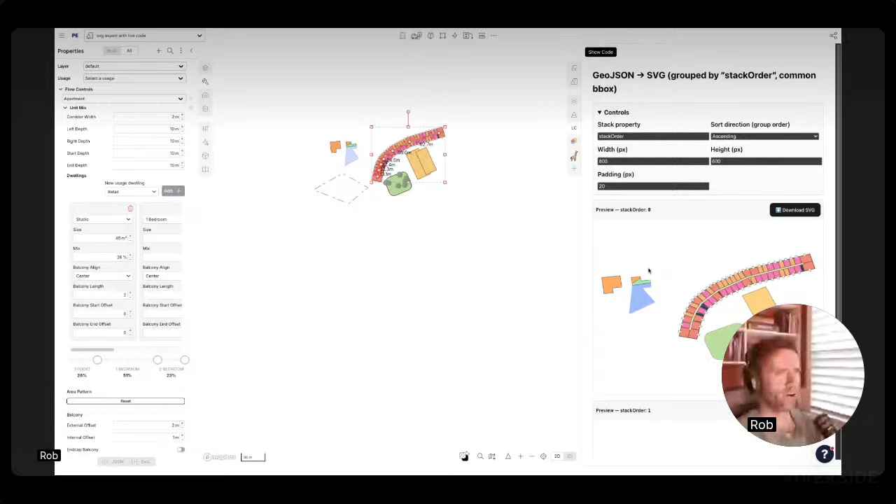One app that I created was a live code app, and that's like a meta app—an app that makes other apps. So the live code app has this canvas here where you can write code, and then you can hide that code, and that code gets rendered in this canvas over here. And the code has to have this exports.userapp function, but then you can do anything.

And the key thing here is this const baked section. This is the Giraffe baked sections—I keep describing Giraffe as this river of data with multiple sources, like the blocks, the usages, the geometries, the flows. The end of the river, when everything's been added and every property's been worked out by the Giraffe engine, is called baked section. So that's baked, we've baked them.

And if you look at the baked section like this—if I add a building, I'll just do a single building and show you the baked section. Say it's a community building. So eval, that should say baked. This is all the data that's been added to this geometry by the engine. So we've got the area, the gross area, the net area, the saleable area, the perimeter, the height, the base height.

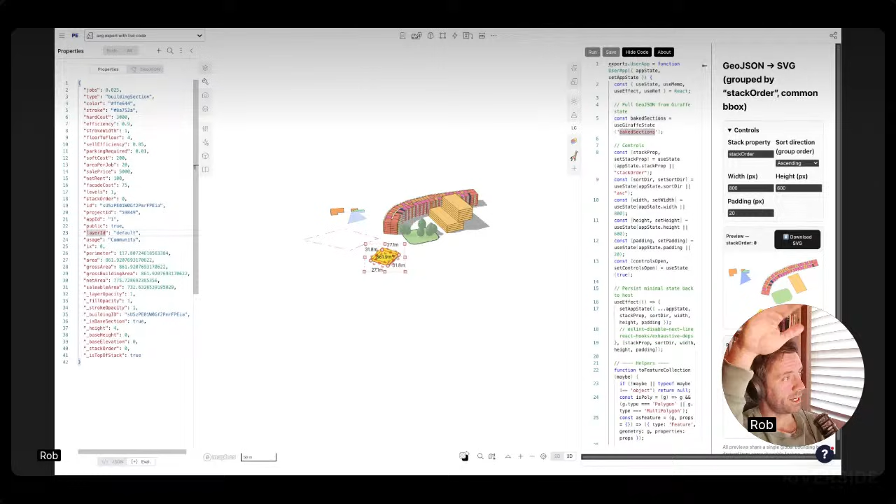Is it the top section in a building? So all of this information, the jobs, all of this stuff - it's coming from the community usage, as well as what the users add, and what the flows added, as well as the block. It's this really rich data set. The input data just says usage community, and then Giraffe is adding the rest.

So that's the baked sections. You get this code over here to grab these baked sections and muck around with them. So this is the example that I needed - I needed SVG out, and you can tell this is written by an LLM.

So I took my default live code app, which just has a little applet, and I said, hey, I've got GeoJSON, and I copied one of my GeoJSONs into the LLM. This is what I'm dealing with, this is the kind of data it gets. And the LLM goes, oh, I see what's going on - this is canonical GeoJSON, and all the properties are in a properties key.

And there's a color property which does color, and there's a stroke color that does stroke. And if I'd added a stroke width, there's a stroke width. There's all the things that the LLM needs to create SVG, because our properties and SVG properties are very similar. Giraffe is very committed to just - if it's color, it's color.

The thing that made me stop using a major vendor is they had a type, like an integer type, but it wasn't just int, it was brand name int. I was like, why the fuck? So all of my code from somewhere else won't work now because your int is not an int, it's a special int. So Giraffe is just - if it's a color, it's a color.

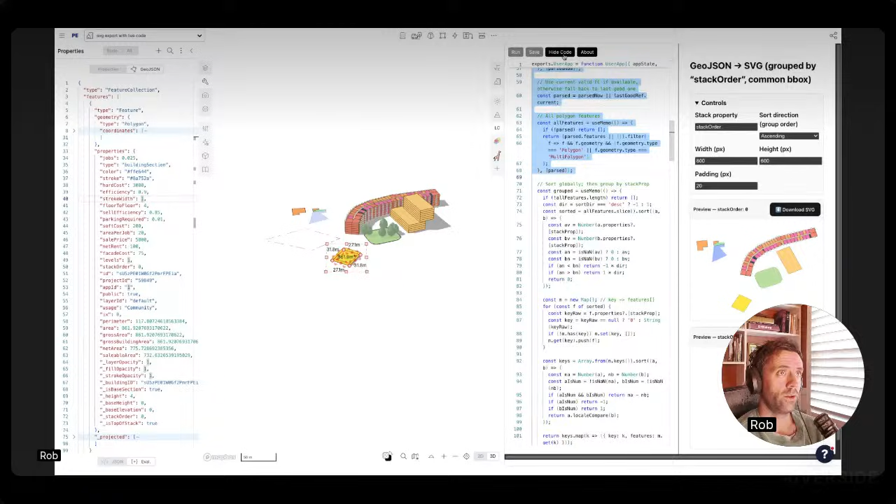So then the LLM did this in one hit, and it produced this code. Now I've got this SVG and I can download that SVG. SVG opens in Illustrator, SVG opens in all sorts of things. And it's just live.

So it's getting my model and creating this SVG, and it's actually doing it by stack order. So if I change the stack order - there's this stack order property somewhere, there it is, stack order - if I change this thing's stack order to 1, it'll put it on that canvas over there. And that way I can export everything by level.

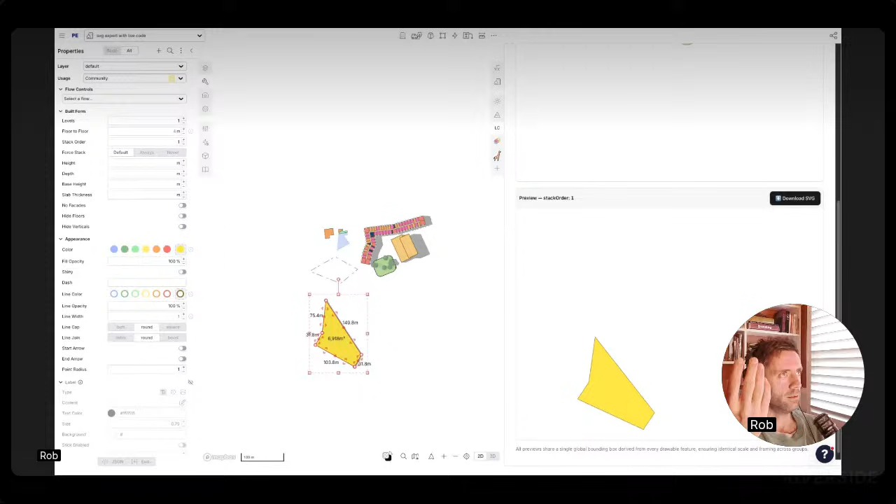So Giraffe didn't have a levels exporter to SVG, but rather than bothering the guys or putting in a feature request, I just implemented that feature for me. And if I wanted to add grid lines, or an area schedule per level, or whatever I wanted to do, I would write my own code.

So if you're in a large practice, you could be dealing with university clients trying to decant students or stage out a master plan. The best thing to do, in my humble opinion, would be to build a Giraffe data ontology like this, and then write an app for that client. So I'll show you the other one I did yesterday, which I am relatively proud of.

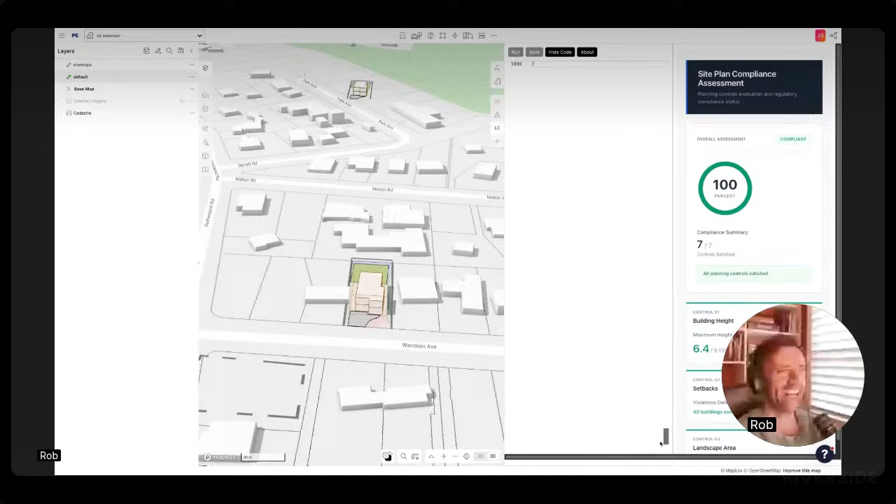Okay, so this is, again, I'm in the live code app. I shared this with someone and he's upgraded it a lot since I last saw it - he's got 1,000 lines of code.

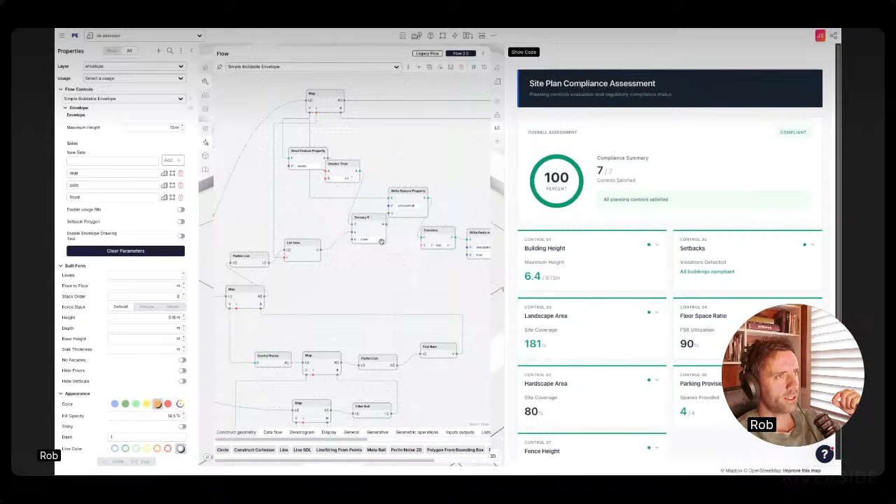So what this thing is doing is there's a flow. I've got this envelope, let me just select it. The envelope is a flow, and it's taking a geometry and creating these zones - the front, the rear, the side setback zones. Then it's going through every geometry in the model, figuring out if there's any intersection - is this geometry in the front setback zone, or the side, or the rear?

So what's going to happen - let me just lock this envelope layer. So this geometry now is tested. And if I move it into this rear setback zone, which you can see if I move it - see that blue zone? That's the rear setback. So if it comes in, the setback is violated.

And if I add the levels, see now the height is violated. And there's a landscape area - so here's my landscape.

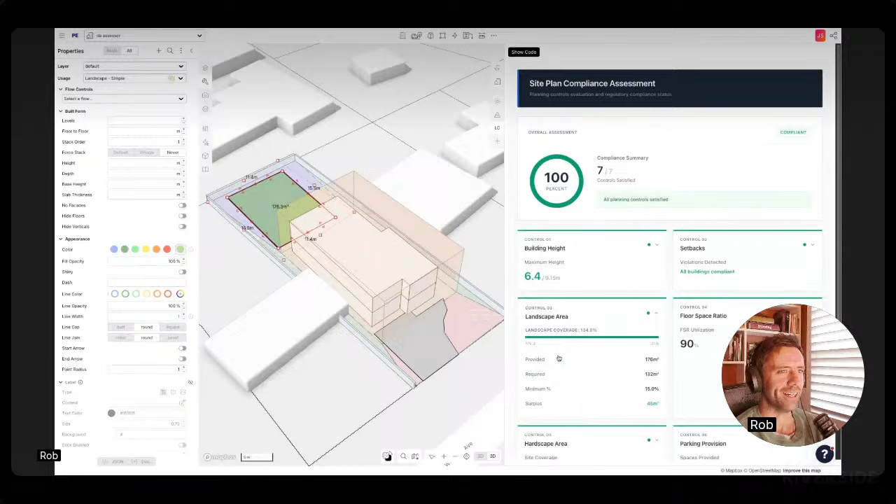And if I shrink it too low, my landscape site coverage gets too low. And he's added this awesome inspector, so I can see how much excess or lack of land I have.

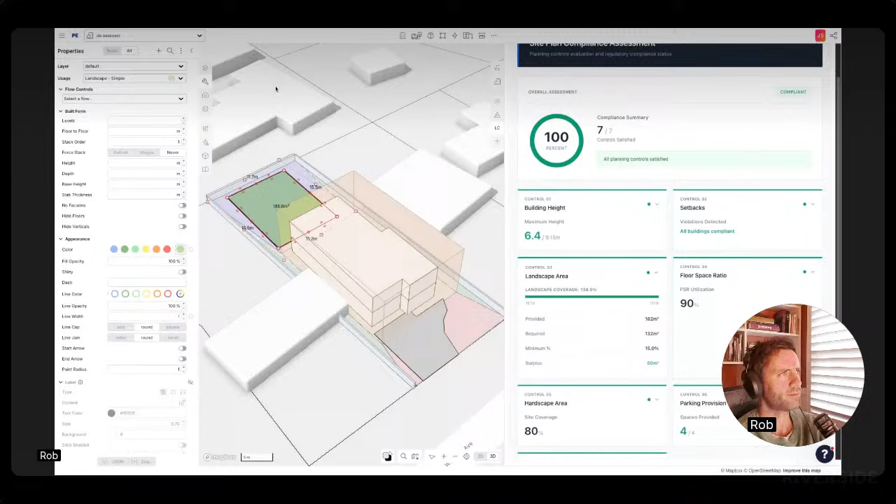This whole app, I promise you, I implemented in 2 hours. Mine looked worse, and I know this particular person, he would have done it quickly because he's a master of the LLMs. But this is a very custom bespoke bit of logic that is taking Giraffe and making it look like something completely different. So now it's like a DA assessment tool, which I guess you may be in a practice doing complex geometry and really difficult projects, like maybe healthcare or defense or education, life sciences, where little house DAs may make no sense to you. But exactly the same techniques work.

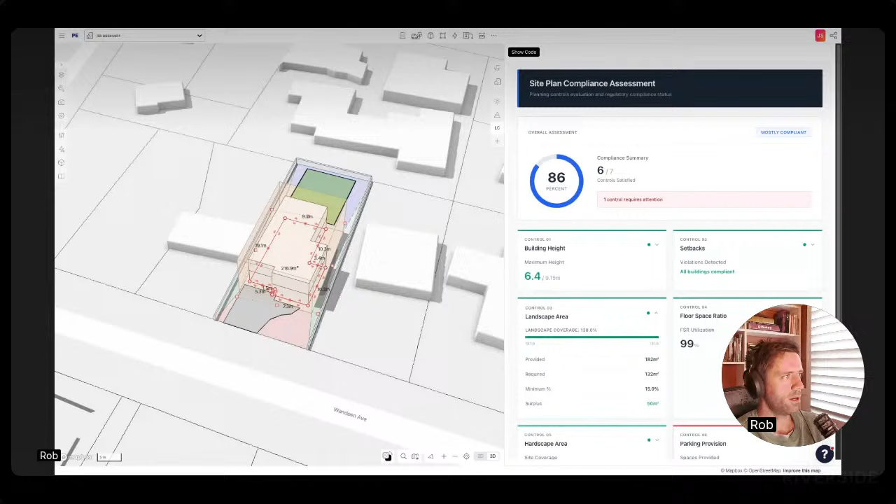Like if you wanted to automate a door schedule, or automate signage and escape routes, etc., it's just going to be code. It's going to look something like this, and it'll output it, and then you brand it and you use it. So I think this is unbelievable. This is kind of agentic - you build these agents and you just keep adding them to the app.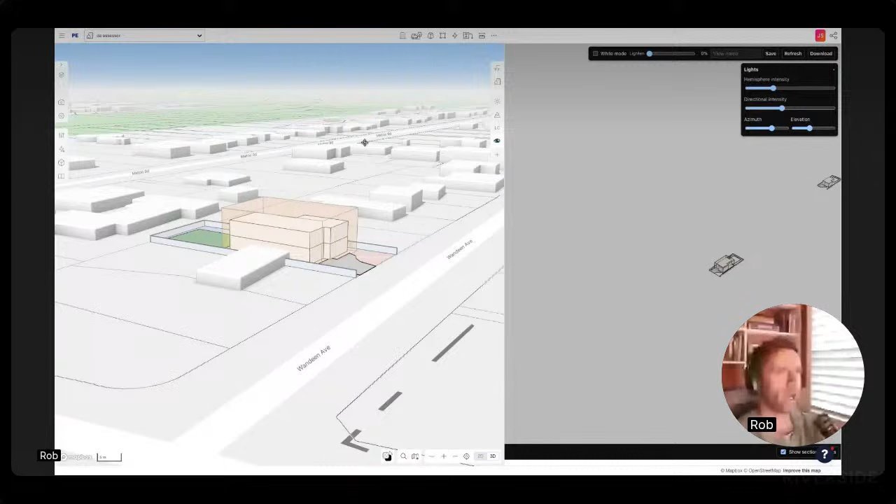I'll show you another one that I built. I had a feature request where someone said, I love Giraffe, but I can't look at the model from underneath. And that's because in Mapbox, the camera will never go negative. So I added this viewer, and you can look underneath. All this is a Three.js window. I added it so you could lighten and change the lights and you could save views. Again, this took probably 2 hours to build this app, and it downloads all the views.

I'll show you one last one, which is another app. If we go back to our dingbat building, which I am for some reason extremely partial to, we've got another app, which is this IFC app we write. So you get this IFC app when you get Giraffe, and all it's doing is exporting to IFC. You can see it takes a while to load because it's actually on a separate server - this is iframed in. So if I select the dingbat, it's going to process those geometries.

583 geometries, and I'll do the little unofficial conic - maybe I won't. But it comes out basically as IFC walls. We're not doing windows yet, but we will soon. This is now a canonical IFC, right? You can open this in Navisworks or Revit or Archi-Cad, whatever it is, and these guys will come in as walls. So there's the IFC walls, the IFC slabs, and it's broken down by story.

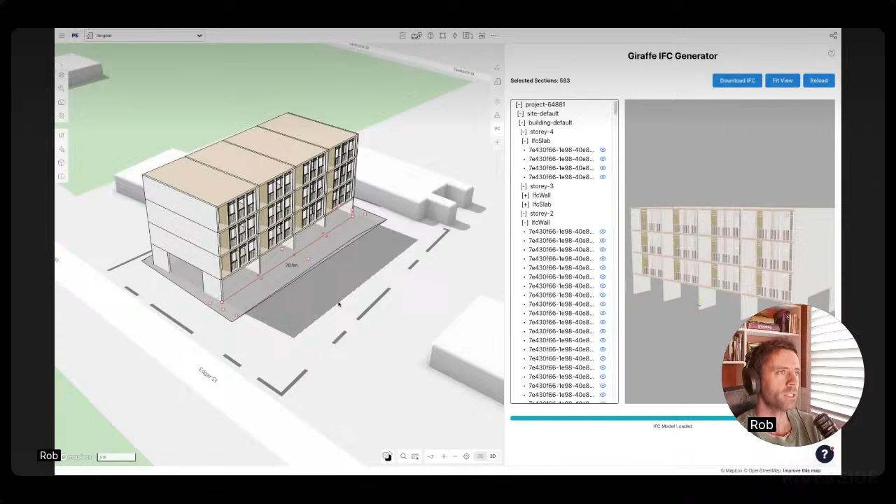So you can imagine as a scaled out planner, you can be building these dingbats all around the place, and then exporting them to IFC to go to the next stage of design. And you could build really - I use the eyedropper there to draw that line and then add the properties. There's a few, you may not like this kind of weird droid appearance, so you can do this thing so it just sits on the ground. But you can imagine a pattern book architecture, like a configurator, either for a master plan or for a firm or for a project, and then export it to IFC, and then inside of a Conic or a Revit, you can then go to the next level.

So what I do is I just download this IFC, it comes down to my downloads, and then I'll just add it here. Hopefully you can't see what I'm doing now. And I'll upload it - it's now uploading into Conic, and then we'll open it and start applying finishes. Hopefully you guys are following what Conic is doing. I think it's pretty incredible, it's unbelievable.

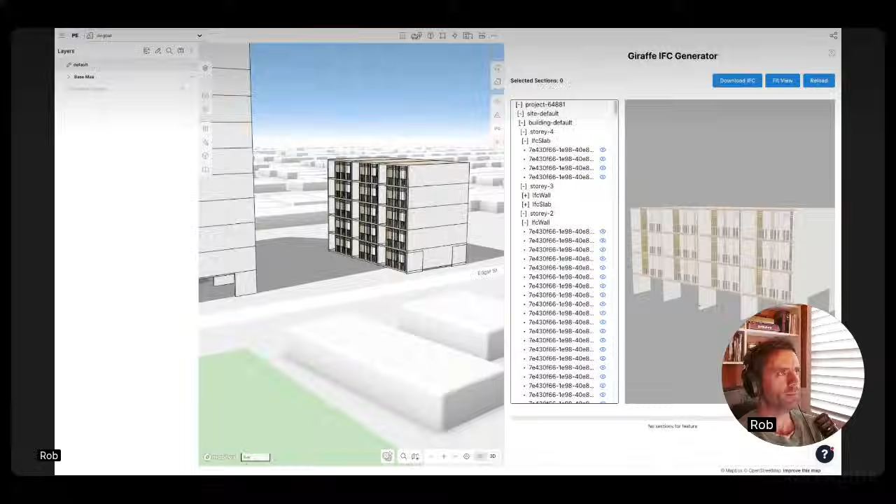So now I'm in Conic. I've just uploaded that file, and so now it's doing its thing, calculating through the geometry, and then we'll have this IFC file that you can start saying, okay, well my ceramic buildup is this, or my insulation, doing IFC kind of detailed design things. So maybe while that loads, I'll keep yakking, unless there's any questions.

Let me jump in. There were a lot of questions at the beginning, and the Giraffe channel answered a couple of them. But first of all, you've built this incredible platform. It's mind blowing what you've built, the depth of it. Particularly given you guys are still somewhat of a bootstrap startup, you don't have massive funding like some of these other guys. No, we don't. It's really incredible what you've built.

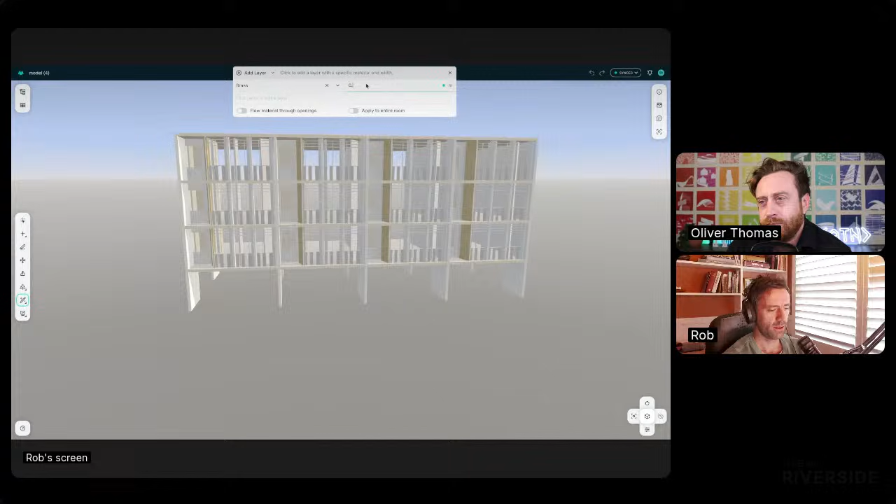So this is it in Conic. If you click on these, Conic has this cool feature where you can add layers. I'll choose a material - it's loading. So I'll choose brass, 0.5 mils of brass, and then you start adding brass to the model. It builds up, and you can see all these junctions. That's a bad junction because of my fault, but if you click heal in Conic, it will resolve and heal these layers, flowing and joining all the walls properly. So you go from a rapid model prototype, and what Conic's doing - which I haven't seen before - is taking semi-structured data and fully structuring it, propagating this information through and using ML to go that last step. I think it's the perfect complement to Giraffe.

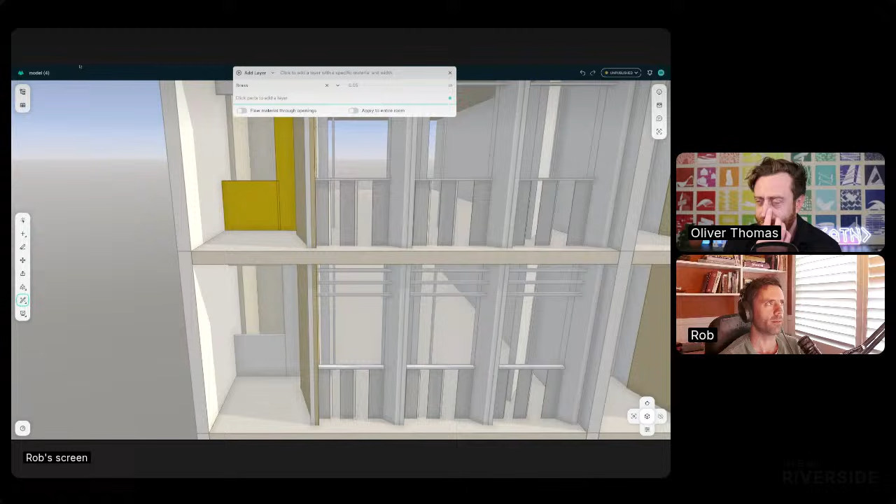It's unbelievable. I see you guys are sort of collaborating in some way, which is quite exciting.

Maybe to summarize, because there's a lot you've covered there - even going back to the beginning of the site, a lot of people were commenting on zooming out to the site, and you've got all these databases. I don't think I've seen a platform where you can access all of this in one place, zooming out into the world. It's good - you don't have all of them right now, but you have London, Hong Kong, and some other places, right? No, I would say we do.

Brazil, Uruguay, wow - as in, if your government or people in your jurisdiction are publishing geodata, you just connect with Giraffe. You find their server and connect to it, and if they've got a password and you have it, you connect. Our clients - we've got users in the Nordics I've never spoken to, and I know they've connected to Nordic data sets, but I don't speak whatever Nordic languages. So the server will be in Norwegian or Swedish or Finnish, but they've connected to it and are using it. So you can configure Giraffe for Japan - we've got Japanese layers and Thai layers in there. You can connect - we've got 30,000 at the moment that I know about, but there'll be others. It's like the age of the API, just connect.

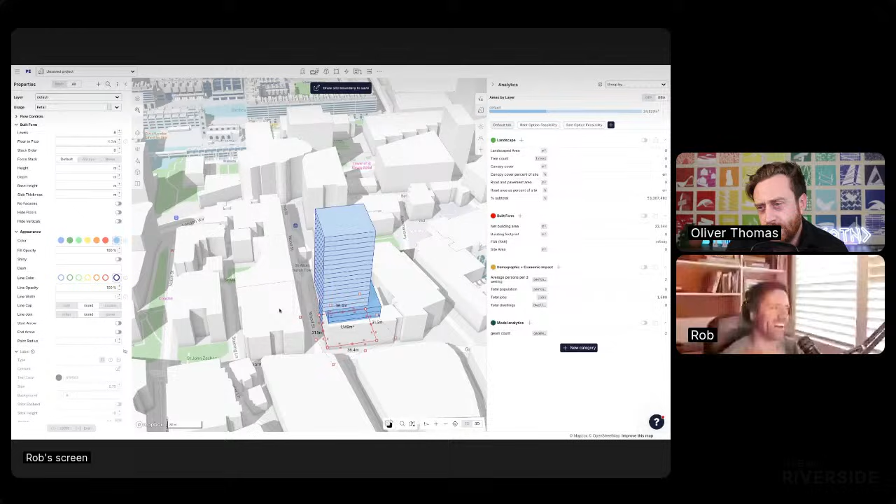Look at that, all the buildings are in that. That's crazy. So if I was going fast, I'd go, what's your site? Okay, this is it. So I won't fill it, but let's do retail ground floor, and then copy paste and we'll do some commercial on top. And then I come here and I'd import my metric template, and now I've got my costs, my feasibility, my income, my building footprint, my FSR, all of that stuff. So when I'm actually going quickly and not belaboring it, you get an insane distance in 5 minutes, like you go from nothing to something really good.

Yeah, and so you can use these scripts which you call flows. Yes. And you can either access ones that have already been built, or build them yourselves, as you were showing there. So you can create your own scripts and processes, and then you can export. I guess we didn't show it, but I know you can export like a document, a PDF or a report.

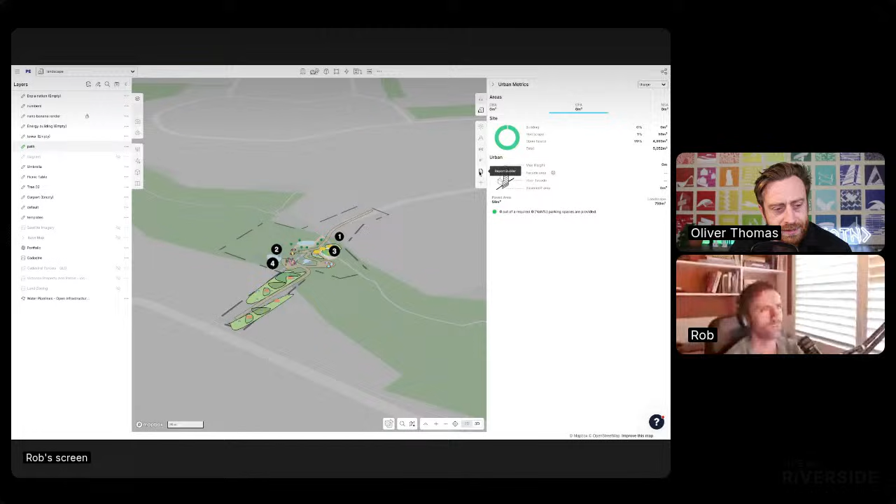Oh yeah, let me show that. Then you've got this kind of what you described as the app maker, which is essentially like, because this is all just data in the background, this app, you can just make anything. Like I need a UK planning report, like this is the format, and you can just kind of make it. It's like a JavaScript app, so it's React. Facebook, Instagram, they're all written in JavaScript, normally React. So you have the entire ecosystem of the internet at your disposal.

Something that was a big thing for me when I started Giraffe, I was in Rhino and I loved Rhino, and I wanted more people to do computational design. I looked at the total number of Grasshopper downloads, at the time it was 200,000 total downloads, it was on the Ning, whatever it was, this was back in the day. And on that same day, I went to NPM, which is the JavaScript library repository, and there was like something for React, something like 2 million downloads that day, just on that day.

So the difference in scale with the internet, right? Think of Google, Facebook, NVIDIA, Microsoft, Canva, Adobe, Figma. Think of their revenue and their R&D spend. The entire revenue of Autodesk is like $4 or $5 billion, maybe 8 or 9. I think Google, like NVIDIA, is going to make 30 billion in profit this quarter, something, it's stupid, right? It's ludicrous. And this is why Nano Banana just hits AEC from the side.

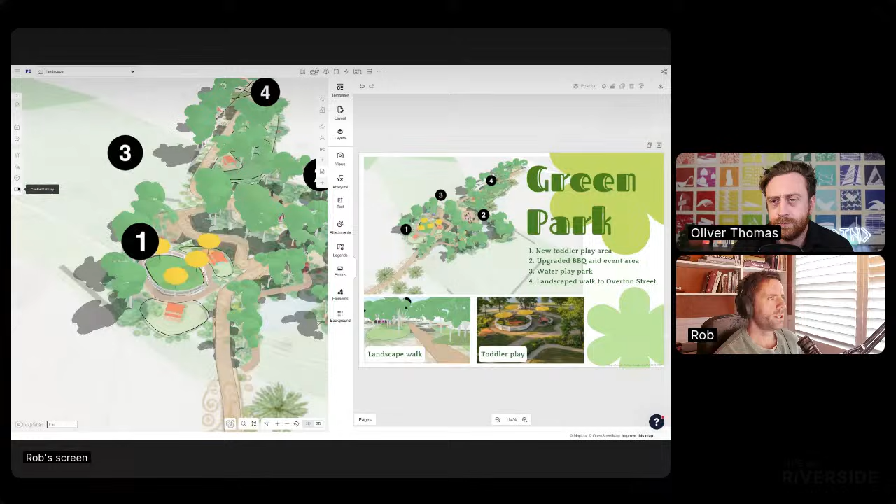Is that how you find people are using it initially? Obviously you have ambitions to go beyond that. But yeah, I think so. That would be fair. I think all these BIM 2.0 crew are in that early stage, drawing blobs basically. Where I see it going is more agentic.

So if you draw a blob and say, hey, this blob represents a commercial building, and I'm an architect and want to shape it like that, there's enough information on the screen to do quite a lot. Like you can have a script that does a facade, or an air conditioning script, or a vertical transportation script that sizes the core - how many lifts do you need? A lot of the AEC jobs depend on the master vision, which is the architect's responsibility - the strategic direction of what shape we're making.

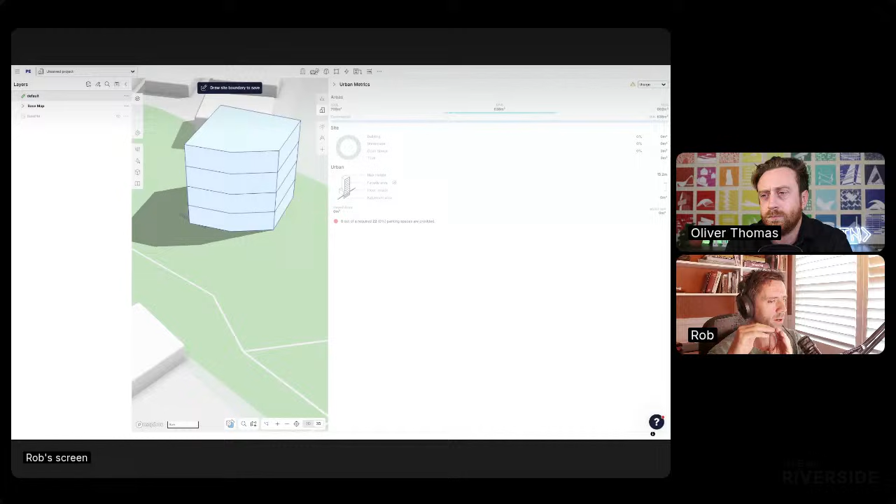So I see it as a service ecosystem - facade engineering, structural engineering, all of those things as a service. I can imagine a world where you draw this and say, hey, I want to see timber diagrid, I want to see in situ concrete, I want to see steel, and it just goes do, do, do, do, and gives you those options. Kind of like Gen AI, but probably not Gen AI, probably actually properly engineered scripts.

And then the architect becomes much more an orchestrator of process, rather than opening it in Revit, placing a little column, drawing five columns, and then sending it to the engineer to analyze. That I think is dying. Once you say a lot of that stuff's going to be automated, the fun bit becomes how do we as human designers help automate it, control the system, and interact with it in a way that isn't like you're getting crushed by the system, if that makes sense.

Well, then you go deep, because you can go further. So say I open this - this is our content library, you can upload content to it, but I can do this. So I just drew that blob, and then I do that, and now I just got the properties, so the base height went up and the levels changed. But there's my blob again, and now I've got a facade on that blob, which may not be the facade I want.

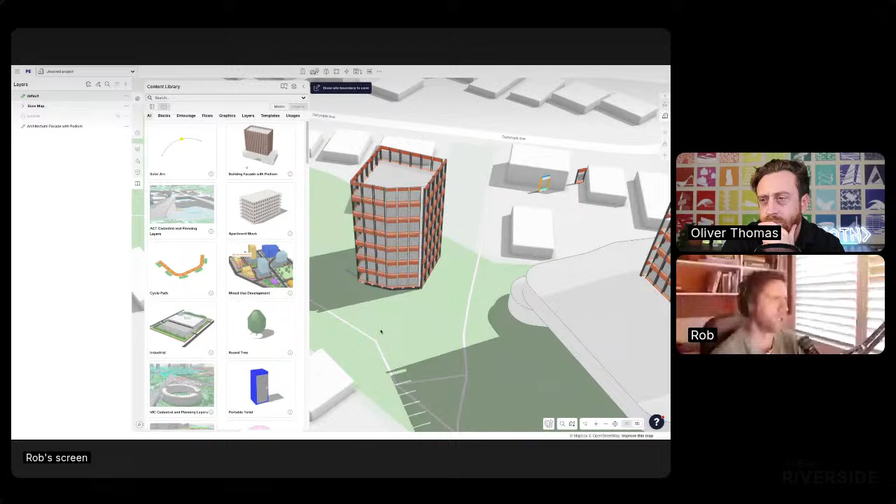Imagine a less crude script - you would just have the right facade on this blob, or within your office this is where I think it could be interesting. In an architectural office, you may have a facade team building parametric facade objects, and a massing team, and those two interact via these scripts.

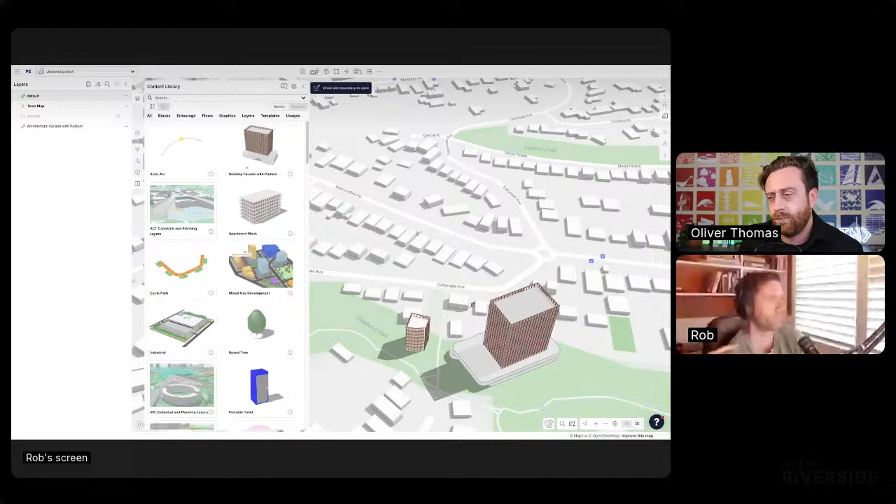So I think this is where it goes to detail, because there's enough information here now to go to manufacture. I should be able to go to the facade manufacturer in Europe or England and say, this is how many panels I want, these are my corner conditions, this is where my building is. I've got it geolocated so the rain, sun, wind - all that engineering, the reflectivity, which streets are nearby - you can do all of that. You don't need much more information, if that makes sense.

Yeah, it does. It's kind of like you need to process the depth of this - it's really impressive. Just the layers of how you built this stuff is incredible.

Yeah, the team - crazy, and the team is small. How many people is it? We're about 15, 16 people, but the R&D function, or the dev function, including me, is about 5.

The crazy thing is most of our salespeople or customer support will often end up just writing apps. Like you'll have a customer in Texas that needs to look at a flood layer or something, and they get confused by the platform. So you write them a little app that just does the one thing they want to do, and that reduces your training burden. So it becomes so configurable, it just grows of its own accord.

I think we were talking in the podcast—you're finding most of your clients, are they more developers than architects? What is your demographic?

I would say an even split. So government—local city municipalities, state governments doing infrastructure like transport or education departments. Then we've got private sector developers, like Trammell Crow or Lendlease, tier ones, and then architects. By number, the architects are probably about 20-30%.

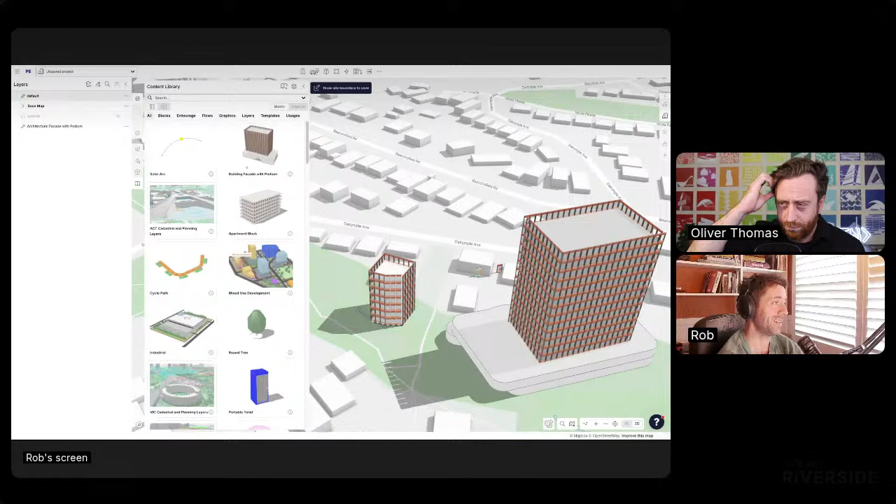I think what I've learned is I was an unusual architect, in that I was far into computational design. I don't know what percentage of architects are computational designers, but probably 10 or 20 percent at the outside—quite low. And there's a bunch of paradigms inside Giraffe that are new even to computational designers, so only now do I realize how fringe this is.

But I do think it behooves you—it will pay back. If you learn this tool, it will pay you back like 1,000 times. Because if you know Giraffe, you actually just understand the internet. It's just JSON, JavaScript, and functions. There's no mystery, no Giraffe-specific knowledge. We could never do a 'Giraffe Uni' to teach you—it's just Postgres, like Instagram. I think Speckle's on Postgres now too. It's raw technology.